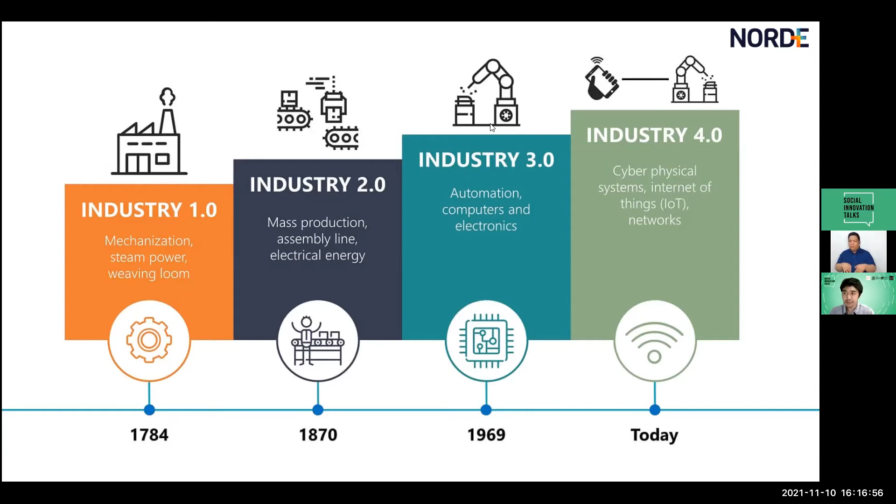Industry 4.0 is really, really big, and as I said before, as people who are living in it, who are experiencing its evolution, many of us are taking it for granted.

For those of you who were born in the age of technology, using this technology may be second nature, natural to learn new programs, new video games, new computers, just like that. But for other people, it's new. And that's what living in a revolution is, a dynamic change, a revolution of the status quo.

To better explain, we'll recap some of the principles and drivers. Industry 4.0, as I've mentioned, is very nebulous. It covers so many topics: health, politics, social welfare, economics. But in order to better see how Industry 4.0 works, we can first look at the principles. These four principles guide Industry 4.0 and benchmark what it's about. First is transparency.

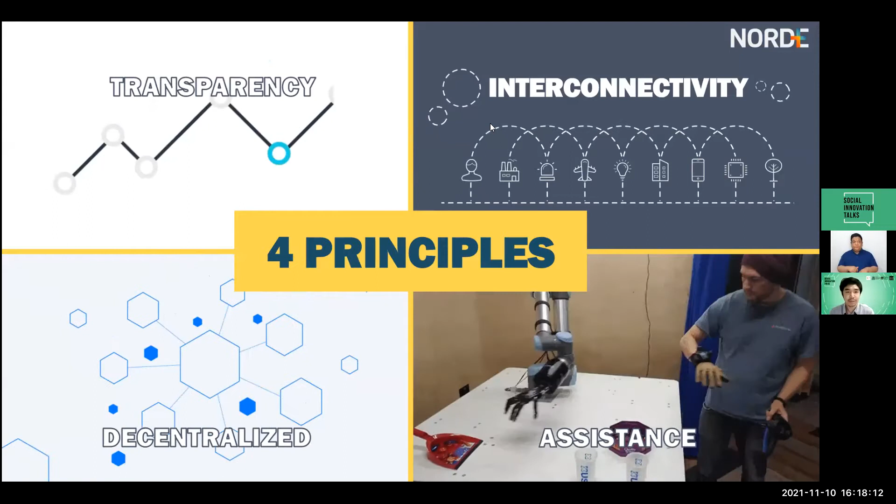Transparency, because we have so many forms of data: collection of health data, environmental data, social data, like the sites we visit, how much time we spend on a computer, how often we go to a coffee shop because we log into their Wi-Fi. We also have data about how many hours we spend playing video games, how much money we spend shopping, how many times we open an app. All of this data reflects this form of transparency, this ability to see and read and understand things.

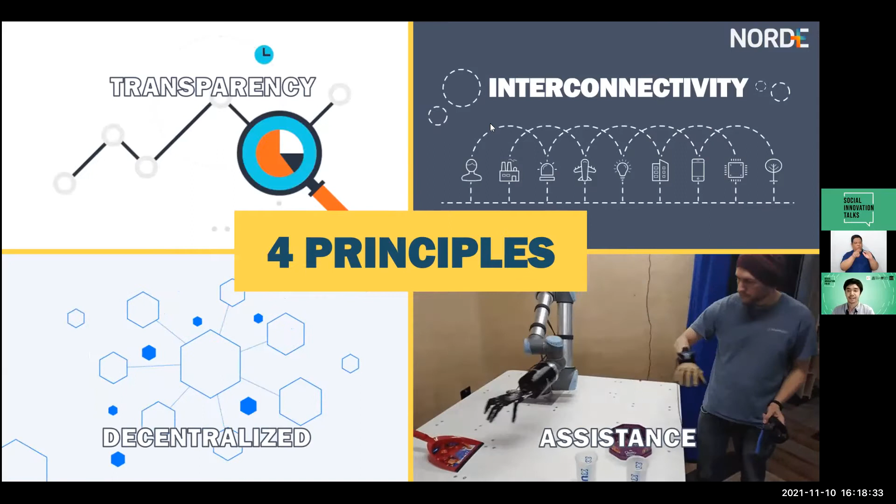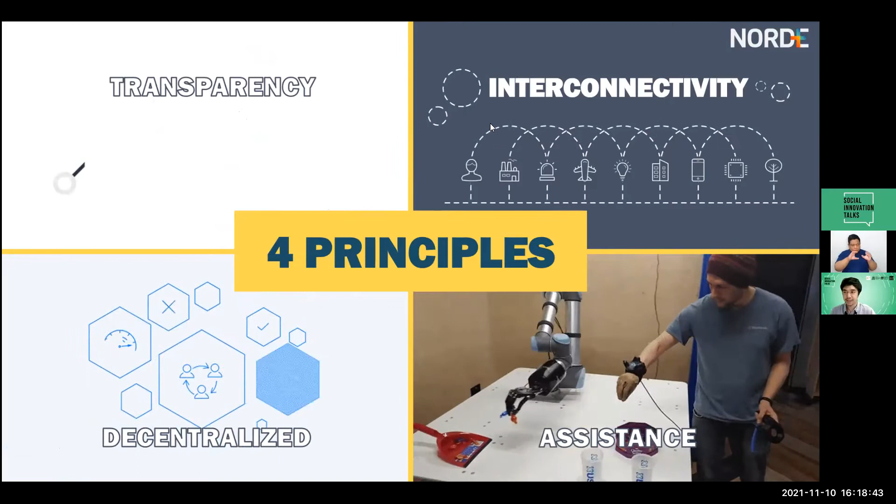Compared to before, let's use the example of the environment. Before, scientists had to make data based off of assumptions and projections off environmental readings. But when people started taking more readings, when there became actual interest in recording the pollution index and the temperature around the world, that data, that ability to see the effects of climate change, allows us to make better choices. We know climate change is happening because the data is there, and that data forms the basis of transparency. So transparency is seeing, reading, and understanding things.

Next is interconnectivity. The internet, probably for me one of the biggest inventions and one of the biggest forces affecting Industry 4.0, has created this interconnected network of systems. These systems could be your cell phone, your computer, even whatever device you're using to watch this webinar now. We have created this interconnected network.

And this has evolved to more than just computers. It's evolved to phones, to your car being connected to Wi-Fi, to street lamps being connected to Wi-Fi. Buses may have their own public Wi-Fi. You may have a local area network within your office that stores data.

All of those are examples of interconnected networks. But it grows and evolves even deeper when you imagine the world. Think about this: you could have been sitting in your house in Germany, for example, and you could have joined our webinar. Because you can do that from around the world, you can have this level of interconnected systems, interconnected people from all over, thanks to the internet.

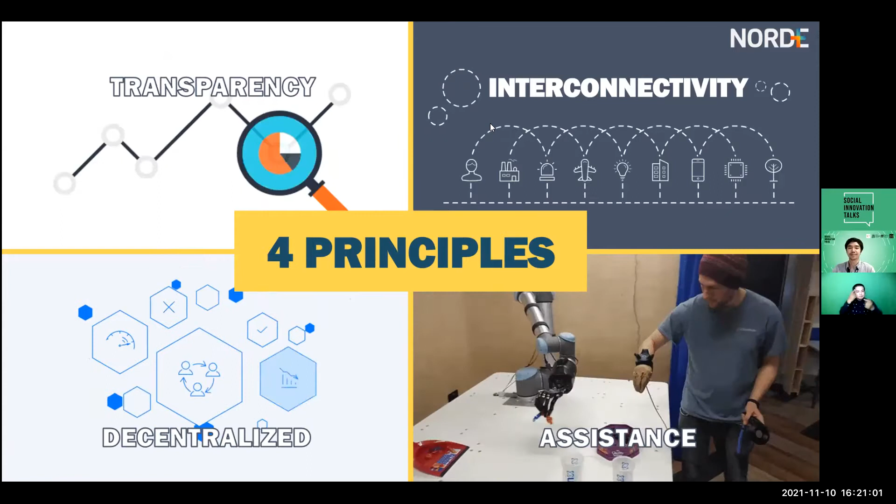The third principle of Industry 4.0 is decentralization. So the idea is, instead of data, information, or a system in general being concentrated in a single place, a single physical space like a computer server, thanks to the internet and Industry 4.0, the information is now decentralized. You have this concept called the cloud, being able to store data in multiple places around the world, and it forms this virtual network of information. That idea of virtual storage is what powers decentralization.

We're no longer limited to central points of importance and information. We're no longer limited to a single DSL cable of a local ISP. With decentralization, our information can be everywhere. I may be presenting this webinar to you right now, but this data could have been shipped to Europe, bounced off a satellite somewhere across the globe, and then sent back to the Philippines. That's all about decentralization—no longer restricting things to a single central point. And thanks to interconnected networks, you have this decentralized system of components and units.

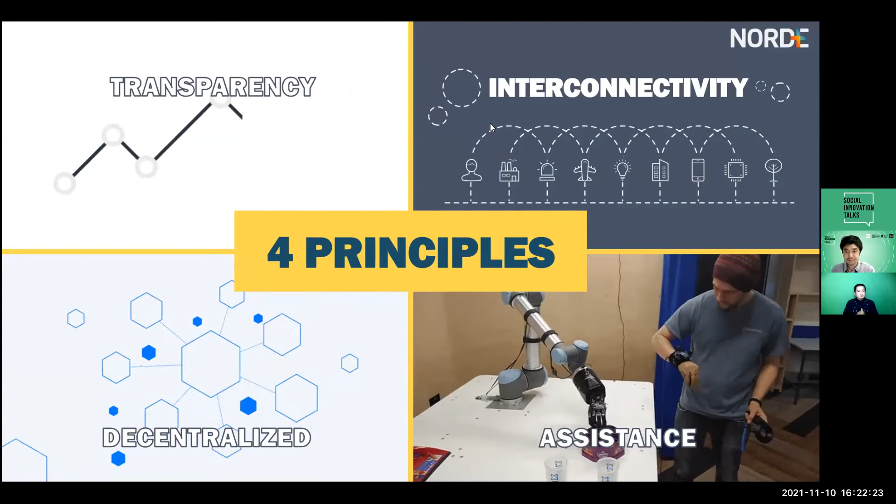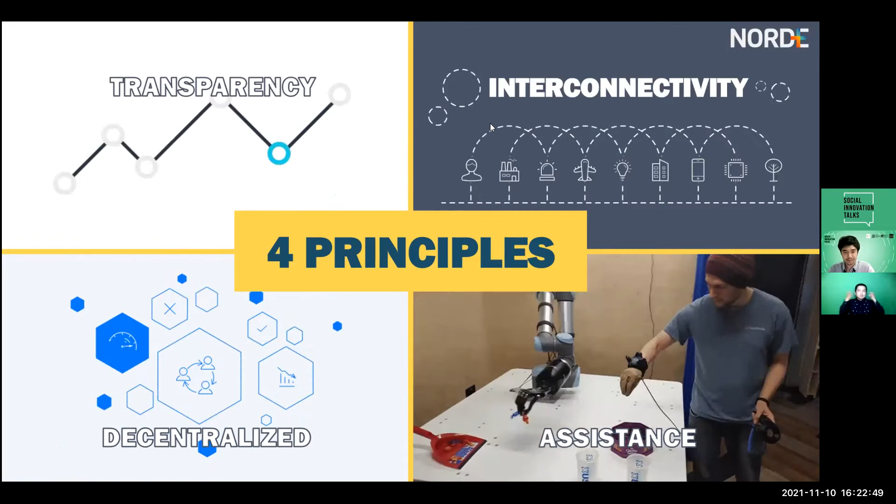The final principle of Industry 4.0, the fourth one, is assistance. All the technology we experience today has been developed, or is in development, as an effort to assist people's living. Your cell phone, your screen that you read, is assisting you to understand information visually. These earphones we wear, the speakers that play sound, assist us to hear that information through audio. So all of these different technologies are such basic forms of assistance that we often don't realize.

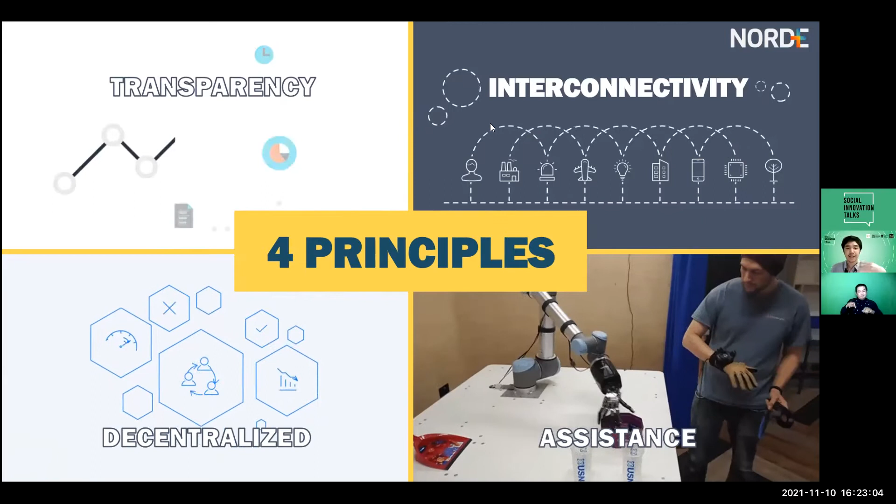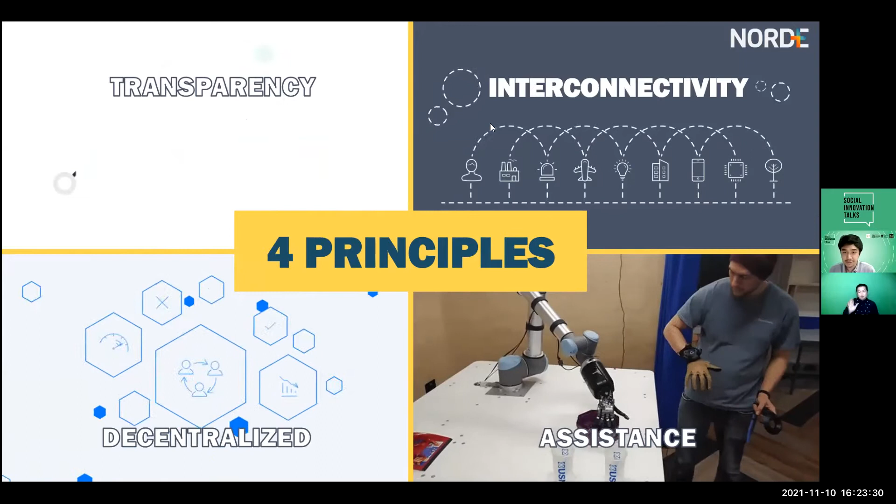Your computer mouse assists you in inputting information to a computer through physical touch. So on a basic level those are some examples, but you can go higher—you have technology that assists you for learning, for example virtual notebooks, ebooks, even e-learning modules. You even have assistance in driving: if you have a car advanced enough to make a sound when you get near an object, those sensors that tell you you're too close assist you.

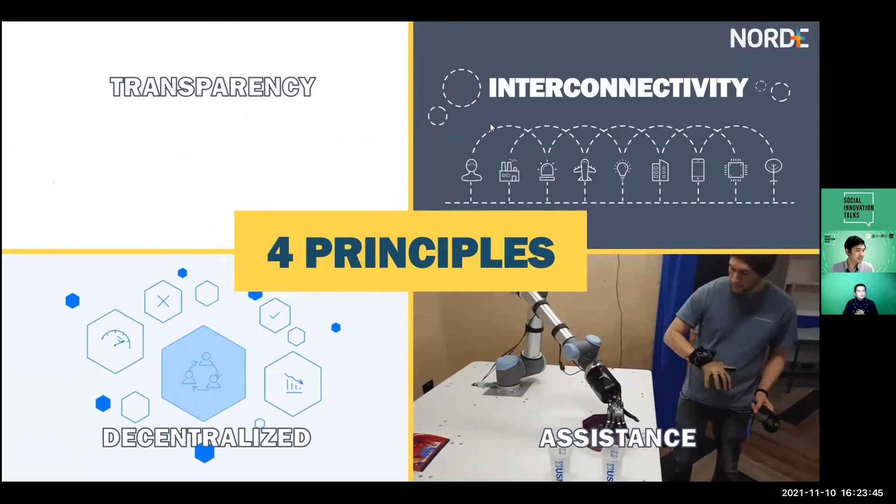All of these technologies have been developed because they assist people to do things easier, to make our lives easier. When you think of it that way, a lot of all the inventions we have—this chair you're sitting on, the screen you're reading—everything is designed in some way to assist people. So those four principles make up Industry 4.0: transparency, interconnectivity, decentralization, as well as assistance. Those are the principles of Industry 4.0.

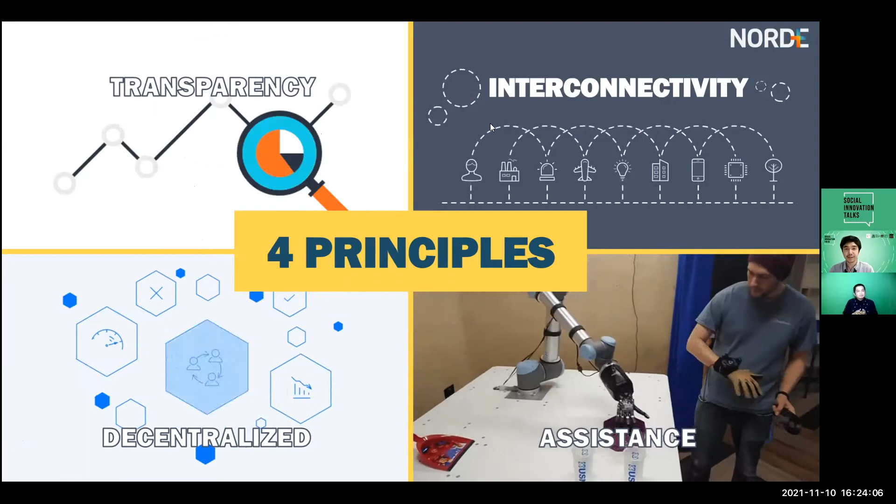Now, if those are the principles, we also want to look at what are the drivers—things that are happening that are pushing us towards Industry 4.0. The funny part is these drivers aren't necessarily consciously being driven. There's not some kind of group or conscious movement pushing people to go to the internet and make online services. No, these drivers can actually come about naturally, maybe through assistance.

The first example is consumer access. When you have the internet, anyone can access it when they have Wi-Fi or a local connection. And if anyone in the world can access the internet, they have access to a whole range of information. When you take that concept and make it normal—it's normal for me to look up what the Fibonacci sequence is, or if I want to look up what art in the Met Museum looks like—it makes it normal for me to want to be able to access information.

Makes me normal for me to want to know things. And this created this idea that thanks to the internet, thanks to these technologies, we deserve to know things. We deserve to know what our government taxes go to. We deserve to know what are the impacts of this particular business. We deserve to know what are the financial reports for our city or our nation, and how does the rising inflation prices affect us. All of these things become taken for granted and standard because consumers desire this access.

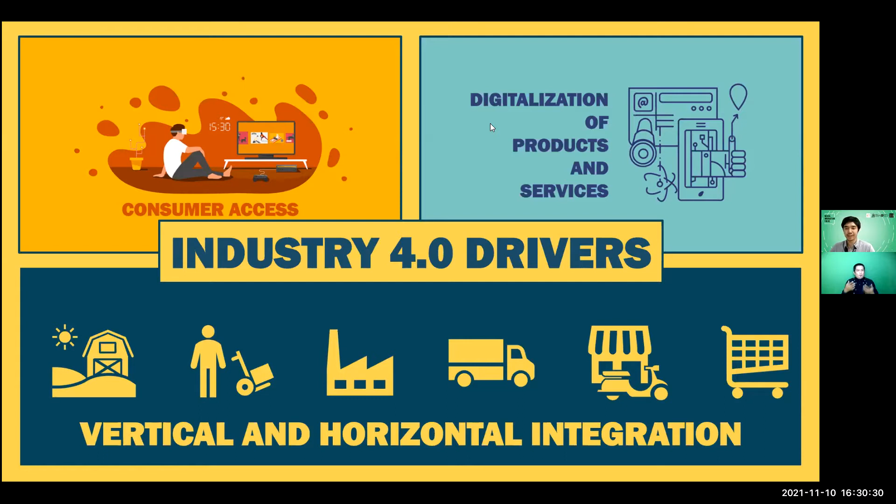And when you think of it that way, it almost feels natural. Indeed, when you're living in Industry 4.0, many of these things feel natural. Of course I'd want to access more things, of course I'd want more services to be digital, of course I want certain processes to be easier thanks to technology. But when you see it's driving this innovation, it makes you think twice: wow, we're really living in a transforming age. We're really in it, and that's my point. We are in it, in Industry 4.0. So I hope that was a good recap for the previous webinar.

Now that we've covered Industry 4.0, one topic we want to cover is the technology itself. We're looking at all these technologies, all this information, and we want to see what's come up. I talked a lot about new technologies, especially digital fabrication. Emerging technologies is hard to define because there's so many new ones, but some of the things we'll cover, especially today and in our next webinar, are the following.

Today specifically, we'll be covering digital fabrication as well as FabLab. In the next coming webinars, we'll be talking about smart cities as well as other technologies such as robotics, artificial intelligence, quantum computing for the future. But for now, we're going to focus on digital fabrication.

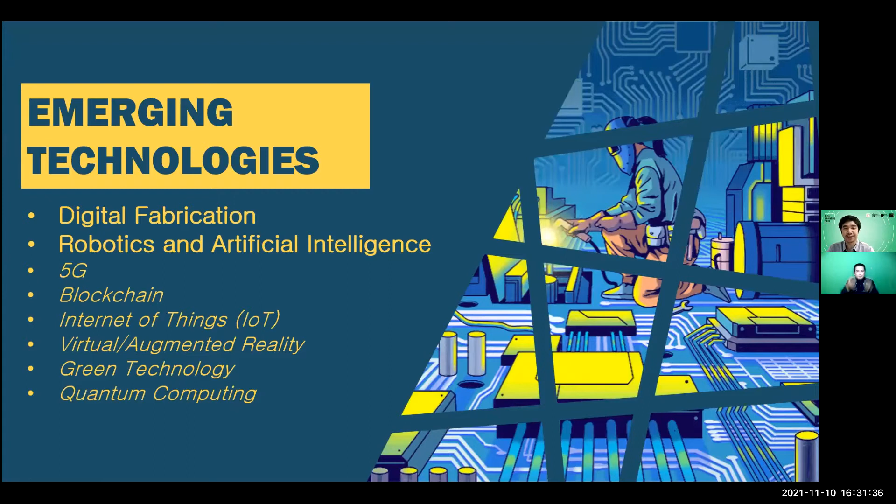When we talk about digital fabrication, the basic idea is making things with the help of digital technology. Digital fabrication to make things. The first thing I want to remind you, which I said at the start, is digital fabrication is a tool, it is a process. Fabrication is making something, but humans have to design, humans have to decide what they're going to make.

Throughout this presentation we're going to talk about different industries which it applies to, different applications you can make, different machines, what are the actual technologies in there. But it's important to keep it human-centric, okay? Because I don't want us to think, wow, with all this new technology we don't need to do anything as human beings, or that we're being replaced. No, these technologies are new ways that humans can make things.

And that is, for me, a very important preface, because it avoids a lot of very difficult arguments when you talk about replacing human workers or making the human useless or worthless. It's not necessarily that accurate, okay? So going to our topic now on digital fabrication: the idea is it combines 3D modeling, also known as computer-aided design or CAD, with additive and subtractive manufacturing. That's the gist of digital fabrication.

Now, the important thing to remember is that CAD stands for computer-aided design, which means this is anything you design or sketch using a computer. This can mean CAD software, for example a basic one would be 3D modeling. If I wanted to make a character for a video game, I would use a 3D model. But it also applies to graphics - if I wanted to make a digital painting, I would use illustration software. That technically is a form of design aided by a computer. If I wanted to make jewelry and sculpt some very detailed earrings, that process of making that model, making that design, is still a form of design, but using a computer.

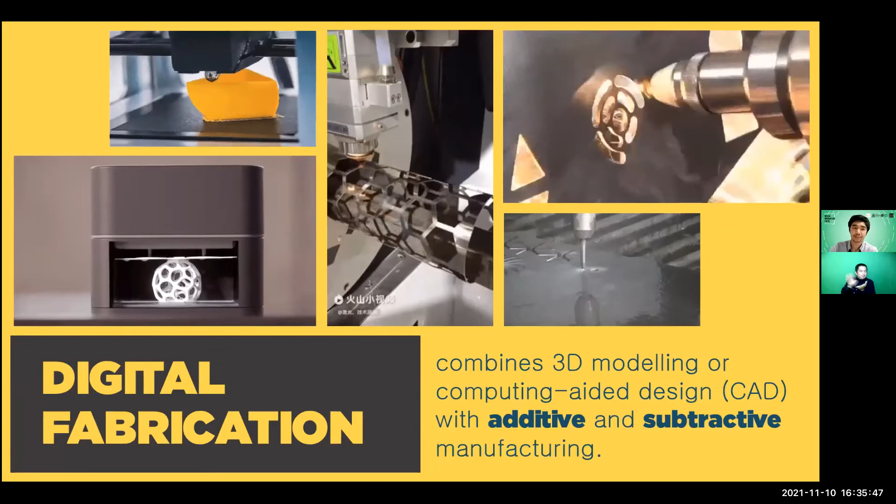Because from my experience, many people know how to use these software, not because it was their job, not because it was their course, but because they wanted to try it out, because they had a hobby, a passion for it. And because they knew how to use digital technology, it wasn't very hard to learn. You could have learned through a video, an online tutorial, like how to make vector art on YouTube, for example. But the idea there is that digital technology, digital design, is more accessible for more people.

It has less cost in terms of barrier of entry. And as long as you're using a computer, you can actually use these technologies. With that in mind, those of you who know how to use CAD, it could be 3D modeling, it could be 2D vector graphics, whatever it is, you can actually use these machines yourself.

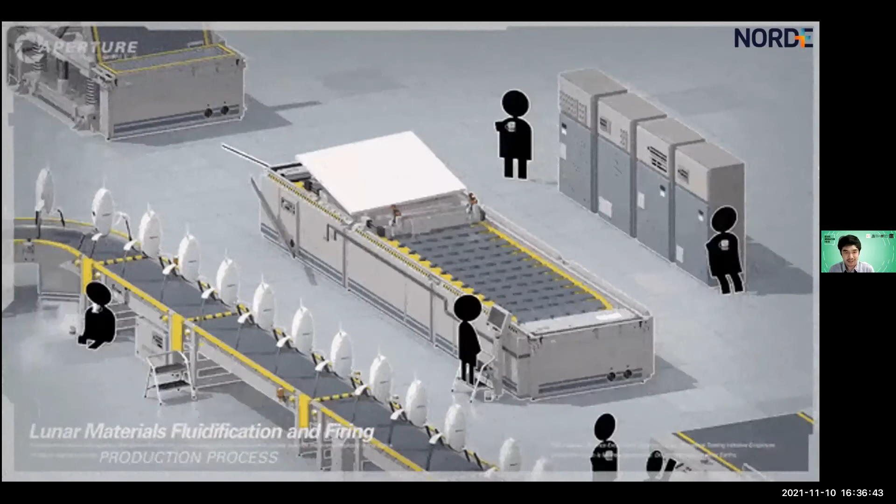Now, when you talk about fabrication, we always imagine a manufacturing plant, right? Some kind of long, complicated, often dangerous process of manufacturing something. But what digital fabrication does is it takes these technologies, this ability to manufacture things, and combines the use of a computer to operate the hardware, the machinery. So instead of having to operate the dangerous equipment yourself, the computer is the one that helps process that fabrication.

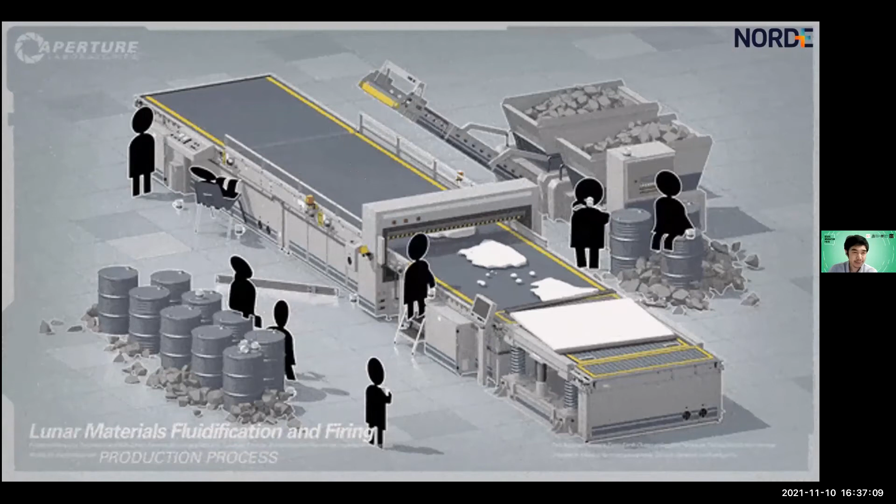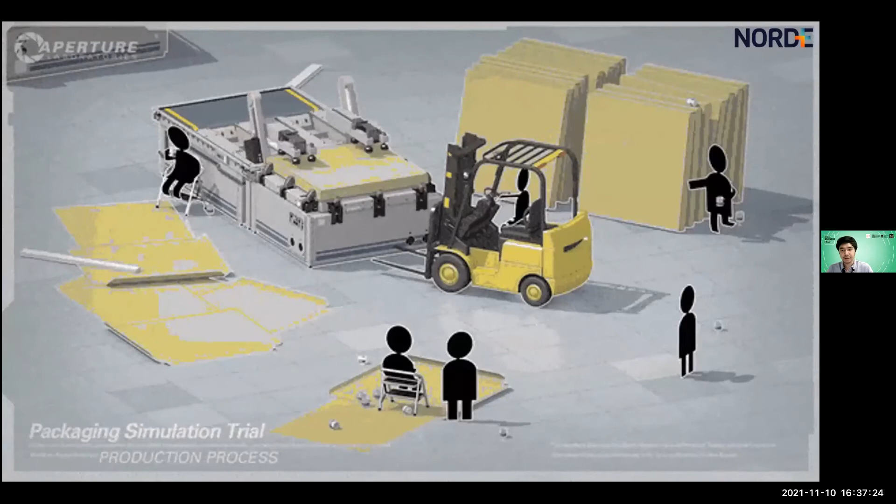So instead of you having to learn how to use a paintbrush, how to draw with a stylus, how to sketch with 3D clay, for example, the software does that for you. The software does the color for you. The software does the thickness of the stroke. The software will tell you what kind of 3D shape you're doing. And that's what makes it digital.

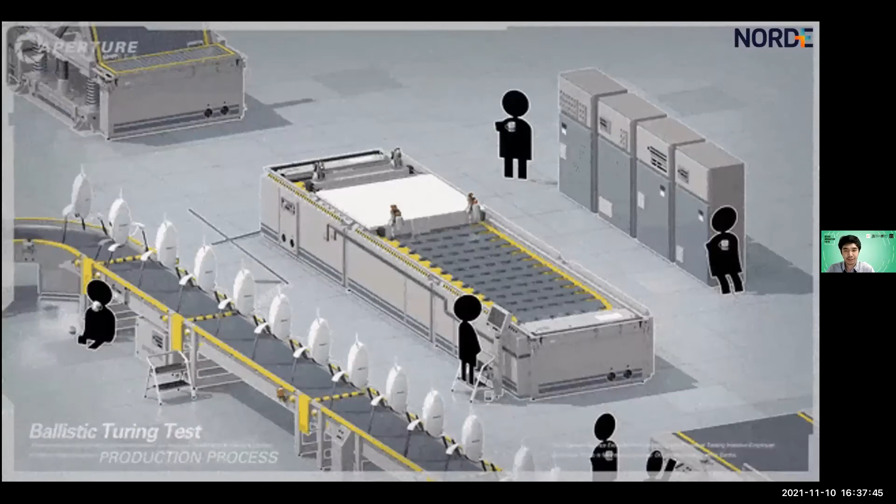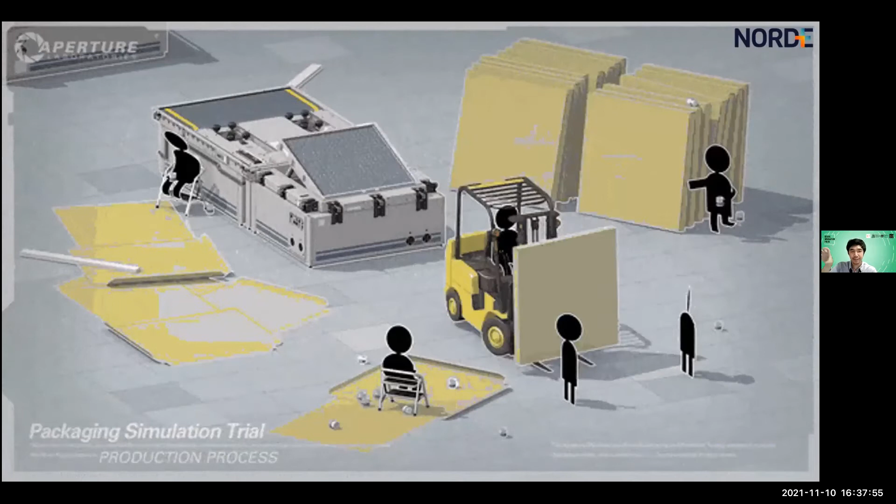And the fabrication part is similar. Instead of knowing exactly how fast the motor should spin, instead of turning a tool by hand or hitting it with force, the computer does that process for you. It knows how much force to put on the material, how fast it should cut through the material. And that's what makes it more accessible, makes it easier. It combines traditional fabrication processes with digital processes, and boom, you have a digital fabrication process.

So there. Now, before we talk about digital fabrication and the many different technologies that are in there, it's easier to set the tone first with applications, meaning where can I use this technology and how can I see it in action?

So when you talk about applications, and we talk about digital fabrication, many people first think of engineering, right? They think of industrial applications, making cars, manufacturing planes, electronics. All of those are usually the first bit. But because of how versatile and flexible digital fabrication is, they've actually started using it in a lot more subjects. But before we go to those, let's first look at engineering.

So CAD was very synonymous with engineering in many ways. Well, first and foremost, it allowed us to visualize complex shapes, complex processes, thanks to computer graphics. And so even complex machinery like this, complex mechanisms, or even the idea of a house, can all be simulated and generated using 3D files.

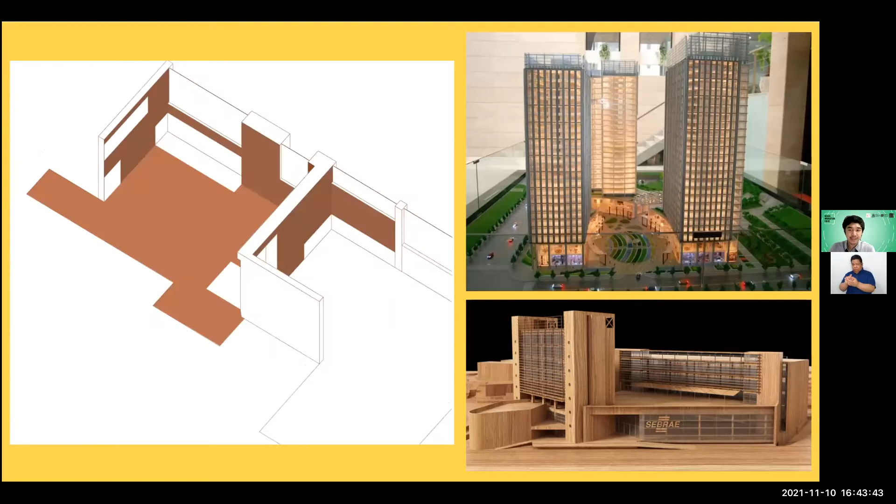So what they do is make it in 3D. They use rendering software such as CAD modeling to make a 3D render of your house or room. From there you have a better understanding of the size, how big the space feels, the way it flows - important details only possible when looking at it in 3D. Then you can take it a step further: instead of just staring at a digital 3D model, you can use a fabrication device that reads your 3D design and manufactures it in real life. These are ideas that go from a traditional idea all the way to a physical concept.

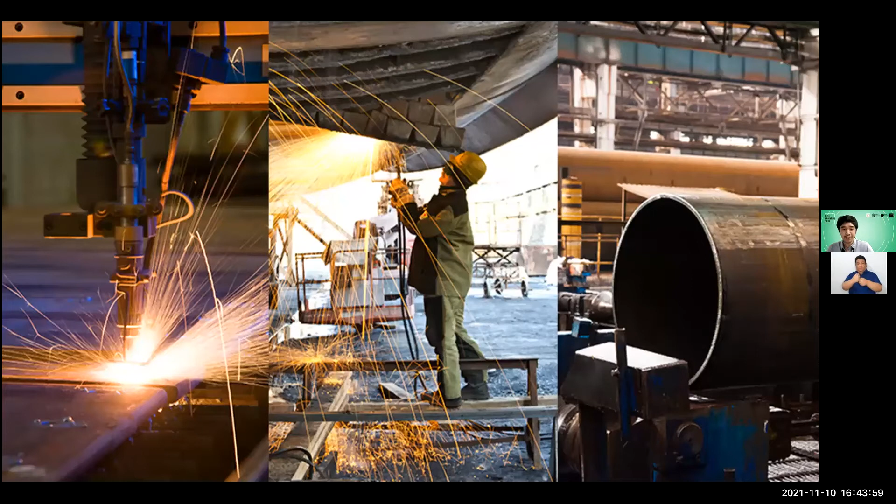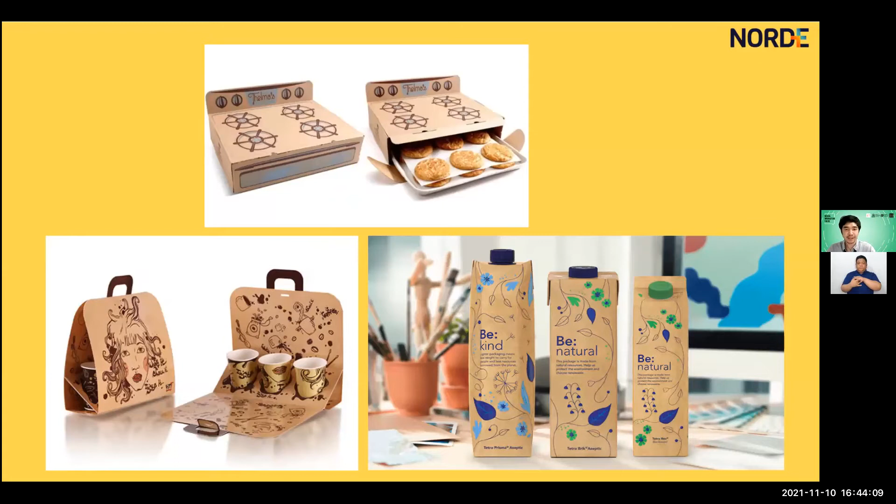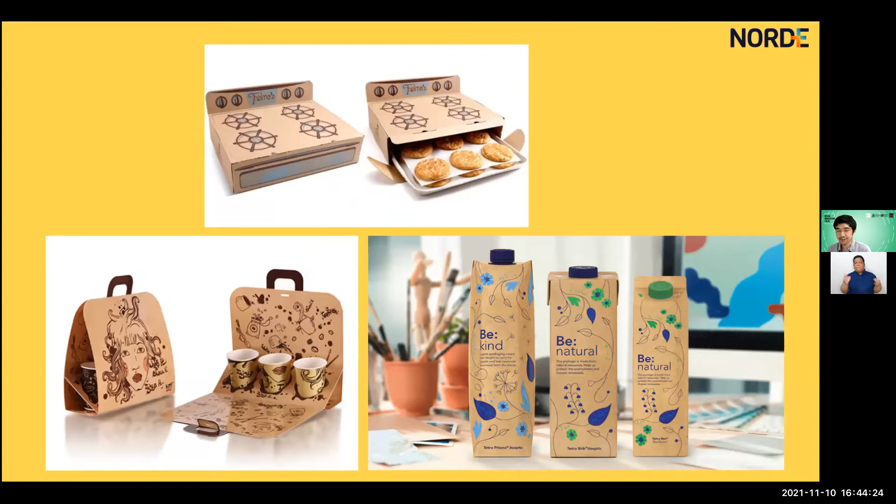Next is manufacturing - when you say fabrication, it's very obvious. Traditional manufacturing processes have been going on for a long time, especially fabrication processes. But combining things like digital technology has opened a new level of detail, a new level of production, a new level of customization and personalization. One example I like to mention is packaging. When you look around, you have so many different kinds of packaging - the boxes your food comes in, the wrapper of the chips you ate, the plastic bag. All of those are forms of packaging, and there are as many kinds of packaging as there are products.

You have hundreds and thousands of different kinds of chips, candy, and food—too many to even mention. So what digital fabrication did is, rather than someone having to create each individual design on their own and repeat it by hand, digital technology allows us to create custom designs that are more fluid.

What do I mean by fluid? If you have a design on Photoshop and want to change the title, say from Gideon's Cookies to Gid's Cookies, it's as simple as opening the text box and deleting characters. But imagine if you had to paint that onto a tarpaulin by hand and post it on a wall. If I wanted to change my name, I'd have to buy a new tarpaulin and have it painted again, going through the entire process. That's definitely harder than just pressing backspace a couple of times on a computer. Digital technology is more flexible and more fluid.

Especially when you look at digital design, because of how easy it is to manipulate digital data in a good way, it's easy to create your own designs. Like right now, we can all go onto Paint and draw up some kind of ugly design for a new cereal box. You could, because the technology lets you do that.

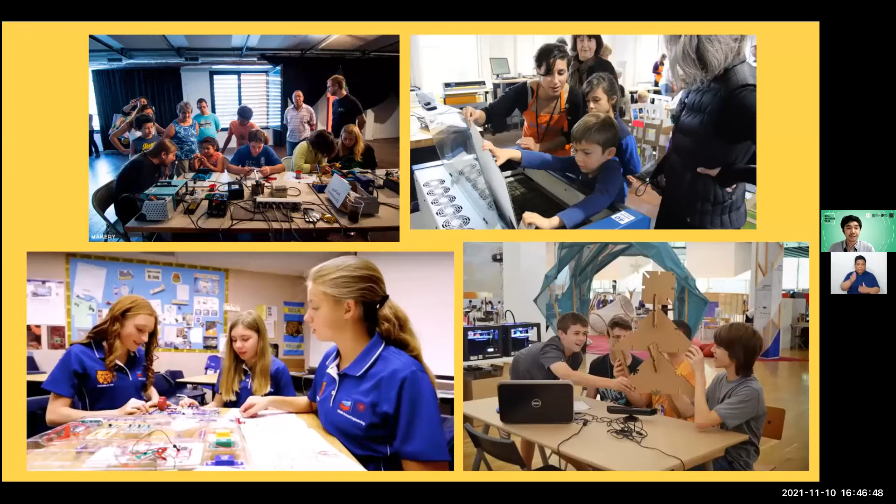Another rising place that digital fabrication has come up is academics. I want to preface this because we're living in Industry 4.0, and this technology is appearing everywhere—not just in our homes, but in our businesses. If you were growing up and wanted to work somewhere, you would have to learn how to use a computer, for example.

Because schools have realized how important these technologies are, it has become part of the curriculum. There are more and more schools adopting digital courses. I think Benilde is actually one of the leading multimedia institutions from what I've gathered. So in the academic section, because people are learning about new things, it's only natural for them to want to integrate digital mediums.

When you're in school, the idea of shop class isn't really existent here in the Philippines, or not so often. But the idea was you learn something in school, and if you went to work in a factory as an adult, you'd have to learn how to use and operate those machineries there. But what happened was, when they took those dangerous machines that were operated by hand and put a computer in charge—handling dangerous processes like pointing a laser beam or moving around the drill bit—they became, in some way, safer to use.

Instead of me having to hold a laser beam and cut a piece of wood, the computer does that for me—I simply tell it what to do. This turned these technologies into safer forms of fabrication. You can have a desktop laser cutter, you can have a 3D printer. This opened up the ability for these dangerous, complex machineries, once only available for manufacturing, to become digital versions that are safer to operate, more reliable, and more compact. Schools realized students can now actually use and learn how to operate these machines and have the skills needed when they go into industry.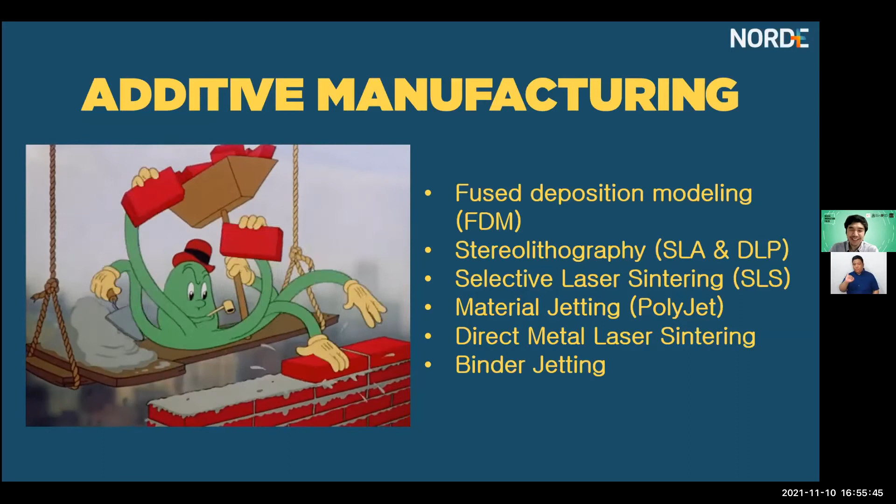And if you look at this list, I believe Nico, one of the names here, mentioned binder jetting as their topic. So I feel like it's a nice sneak peek, and also very advanced because it's part of the different technologies.

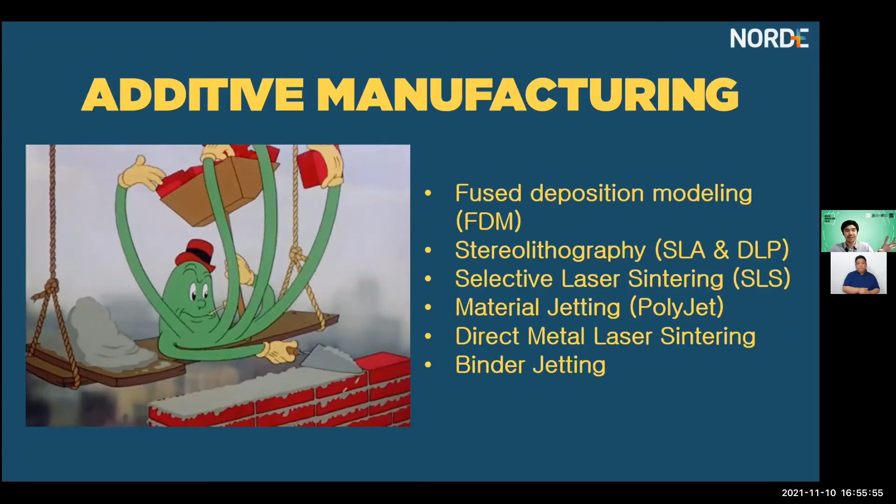Now when we look at the technologies themselves, the important thing to remember is that they're all additive, so it helps us to understand them. And the things you can make with them are kind of virtually anything. Not anything, okay, because there are some things that are impossible to make, but almost anything can be made using these processes. Why? The advantage of additive manufacturing is because you're building it up layer by layer.

That means that complex shapes can be built slowly. Do I have an example here of something that's complex? Here, for example, this thing. Oh no, the webcam is having a struggle. So you can do it, you can do it. Okay, there.

So this is actually an engine housing from an engine block, right? And if you see all the holes in there, this is actually very complex to make. If I were to ask you to mold this out of clay, it would be quite difficult. If I were to ask you to cut this out of a piece of wood, like carve it up, I'm sure you would have an even harder time. But because additive manufacturing builds the layers, come on, you can do it.

Because additive manufacturing builds it layer by layer, it actually is quite simple when you see it from that perspective. So it may look very complicated with a lot of parts, but when you dissect it into each layer, it's like a big pizza, you know, one slice, put the next slice, then the next slice. So all of these shapes in this example look complex, you see complex patterns, complex geometry. But when you look at it from the perspective of building it layer by layer, it's easier to see how you can break down that complexity. And indeed, it's one of the strengths of additive manufacturing, the ability to make complex shapes.

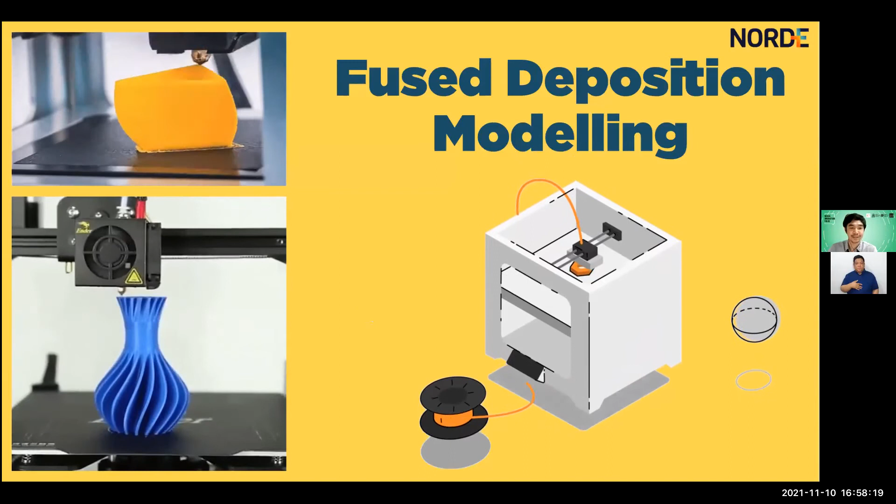Because in a 3D printer or FDM printer, it takes a spool of material, usually this is plastic, right? It's like a string. And it will deposit it in a specific pattern or shape and fuse it together using the heat of the plastic. And when you fuse and deposit material in a specific shape and you model the final shape, you can get stuff like this.

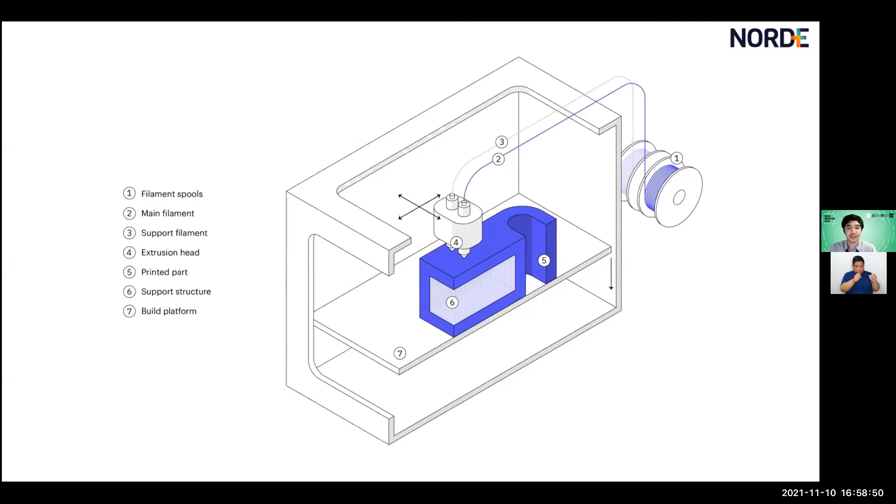So for example, our complex geometries such as this are made possible because it fuses material together using the heat of the plastic by depositing it in a specific pattern. The cool part is the machine deposits the pattern according to your design, so the machine itself is actually very flexible in what it can make. Believe it or not, one machine can actually make all of these designs, whether you're using it for art, architecture, engineering, or even to make a beer holder. All those different shapes can be made using the same machine because it deposits material in a specific pattern, not limited to one specific shape.

Okay, so next one is called SLA printing. This may have other names like resin printing or DLP. The idea here is that instead of using a liquid plastic, we use a liquid resin instead, and this resin is cured or hardened using light. So what happens is there's a pool of liquid resin, and a beam of light hardens the resin at specific points, generating the geometry.

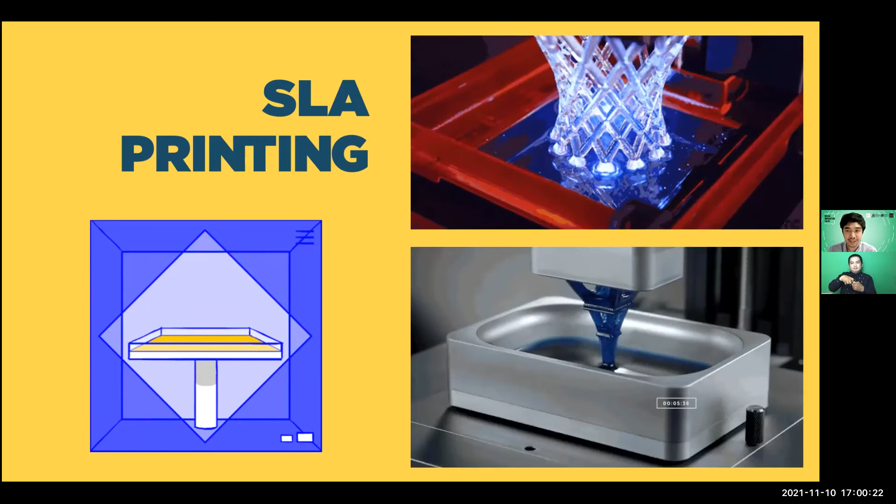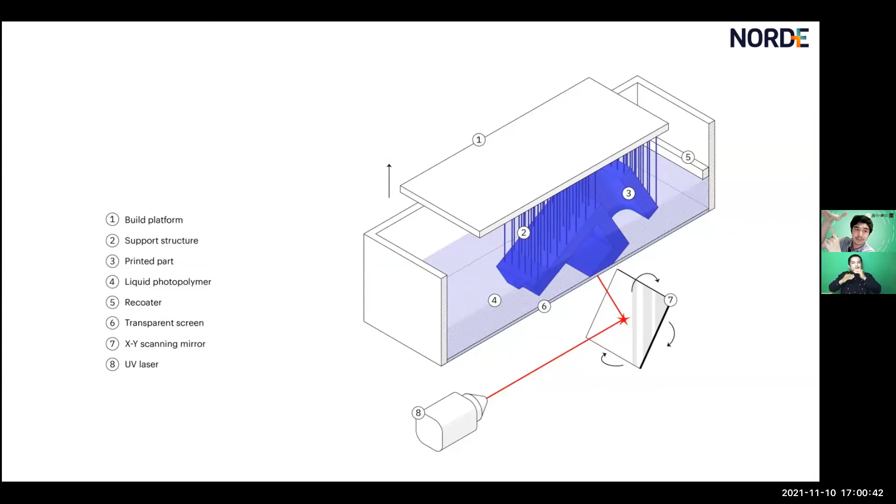The benefit is because we're using a beam of light, which can be very precise, you can make very intricate shapes. In this case, the object is immersed in a vat of liquid, and a laser beam is shot and aimed at a specific point. That point hardens the material and builds up the shape slowly, layer by layer, going up until it makes a shape. So when we talk about SLA or any of these resin processes, they're usually a lot more accurate and have finer detail because you can use a very concentrated beam of light to harden the resin.

So the benefits are these are usually used in more decorative applications, for example jewelry, and in cases where you need fine detail and complex shapes. You can contrast this with plastic, which has specific properties - it shrinks, it melts in heat. But resin has more flexible design parameters, meaning it's easier to create complex shapes like bones, architecture, small pieces of jewelry. They even have resin printers that can go as small as 30 microns, which is definitely smaller than a human hair. There are very intricate things you can make with SLA, usually meant for jewelry or these kinds of applications.

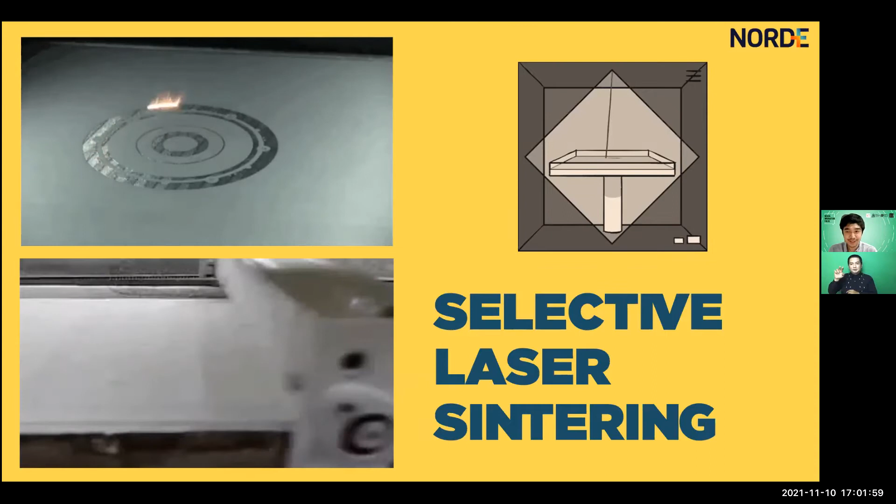Now, next one is called selective laser sintering. Okay, so we'll break it down. It's selective because it chooses a specific part, which is the model. Laser, because it uses a high-powered laser. And then the keyword here is sintering - sintering is the act of joining or sticking something together using heat or using a process.

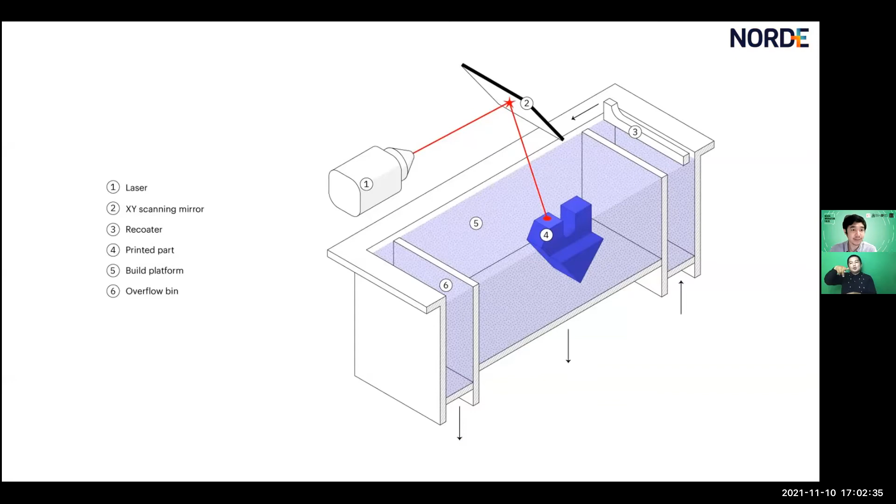So this is actually very similar to SLA. In SLA, they use liquid resin. In SLS, or selective laser sintering, they sometimes use powder of, let's say, metal or polymers. This powder of material is zapped by a laser that fuses it together. So imagine the complex shapes you can do with SLA, but combined with the material properties of polymers - this could be nylon - and you create shapes like these. These machines are usually more expensive because they need a very high-powered laser, but in turn they produce output that is engineering grade, meaning very strong, mechanically safe and sound to use.

And there are a lot of things you can do here - you could create intricate shapes. They're usually used in engineering applications, for example where you need something to look like an injection molded part, but is actually made using additive manufacturing. And again, it's additive because you laser the powder and build that shape slowly, layer by layer.

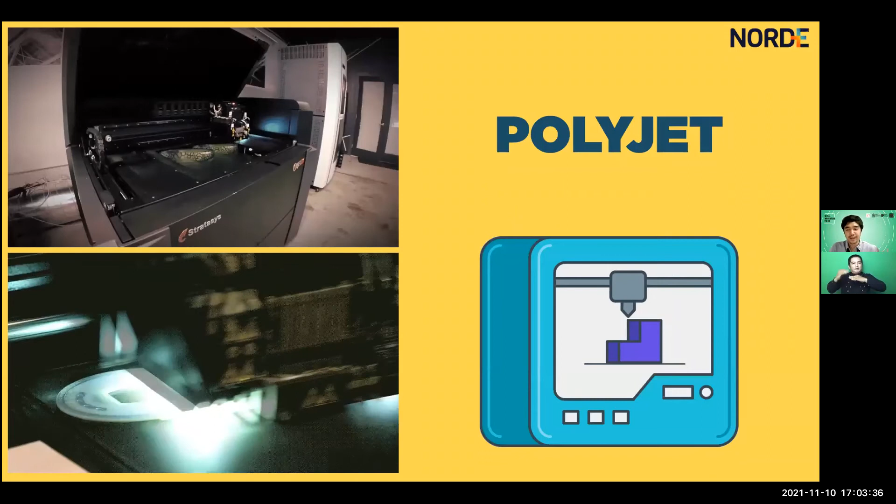Now, next one is called Polyjet. To explain Polyjet, it's helpful to think of your desktop printer. In the desktop printer, the print head moves around and shoots colored ink at specific points. What Polyjet does is combine that technology, but instead of shooting regular ink, it shoots resin ink that can cure and harden, and it does this layer by layer. If you could take your DeskJet printer and make it print upwards, you would kind of have the same thing.

It builds it slowly using small droplets of resin. That's why it's called jet - it jets and sprays to make these patterns. The similarity to DeskJet printing is that you can even use colors. If you use colored resin, you can make intricate shapes like these.

For those familiar with 3D printing, when I show images like these, the usual idea is that they were painted, assembled, or post-processed in some way. But using a Polyjet printer allows you to have this level of control, and you can make multicolor prints like this. Polyjet is one of the cutting edge technologies in 3D printing, and it hasn't been fully widespread - it's very expensive. But seeing these things, the possibilities are really insane.

They've been used in medical applications - you can see they can map out every individual vein and artery inside the heart. They've done it for brain scans, taking individual blood vessels inside the brain and printing them in 3D form. They've used these for surgeons - for example, if there's a tumor in the kidney, rather than using a CT scan or 2D X-ray to base their operation, they can 3D print an accurate, life-like replica of the human body to show those tiny details and help them plan. It's really incredible the things they can do.

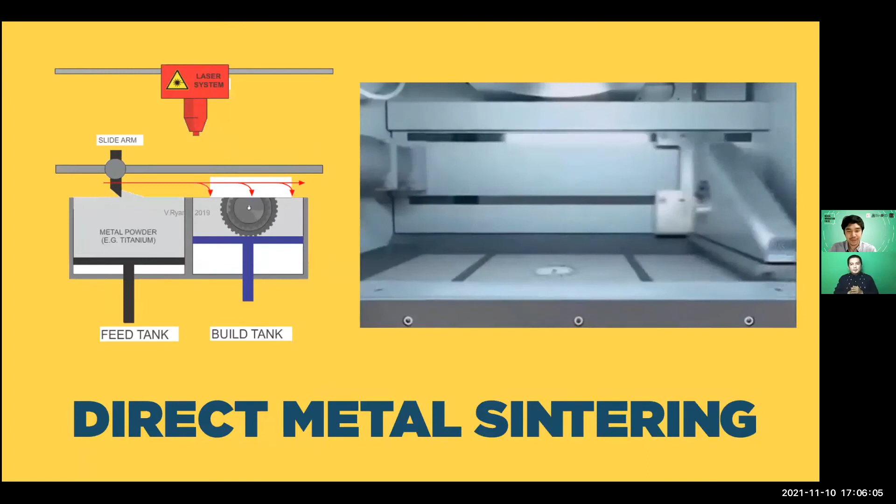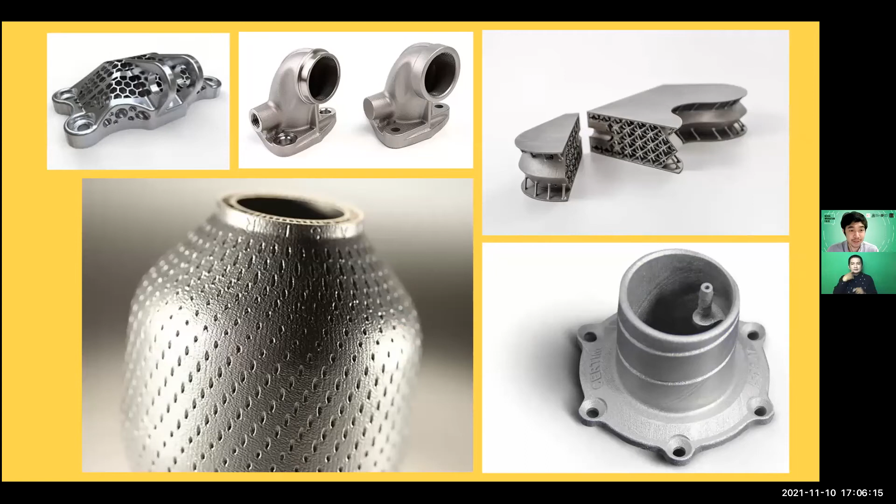Now the next one I'll discuss is called direct metal sintering. This is very similar to what we discussed about SLS - it uses the same word, sintering. But the difference is it uses metal powder. A lot of questions people ask are: can you 3D print metal? The truth is yes. You need a specific machine, and they are actually quite expensive, but you can.

In this process, you can build up metal objects by lasering the metal particles together - that's what direct metal sintering does. It lasers those metal particles and sinters them together into complex shapes. Some of the things people have done with this, because it's using additive technology, is build these complex shapes.

They've actually used it to develop lighter engine turbines. Imagine the picture in the top right - that complex, intricate network of parts. It has the same structural strength as if it were solid, but it's only 80% the weight. Those kinds of innovations are possible because of additive manufacturing. If I asked you to make that kind of structure using a drill without destroying it, it would be impossible. If I asked you to cast that in a mold, you wouldn't be able to make that geometry. There are things possible thanks to additive manufacturing, and these technologies make it doable.

Again, it's similar to SLS - it uses a laser that sinters a powder, but this time the powder is usually metal. That's direct metal sintering.

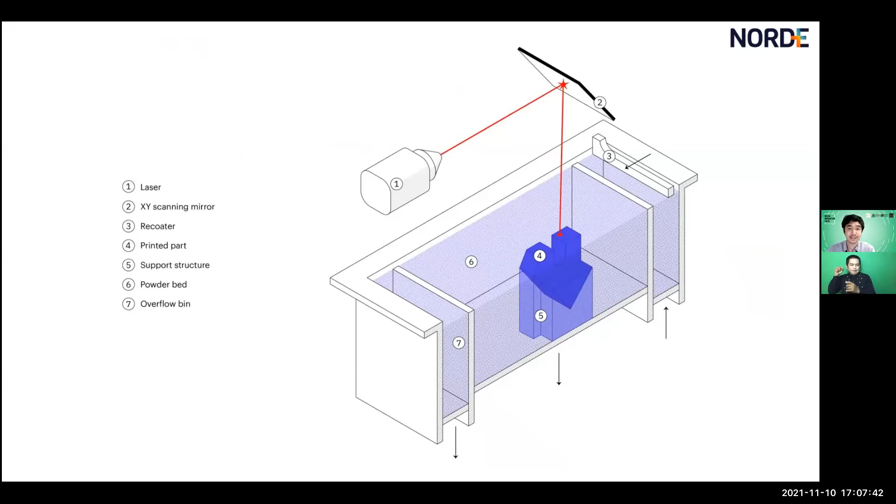Okay, next one is binder jetting. This was something Cernico posted about, I think. To explain binder jetting, imagine you're at the beach and you want to build a sandcastle, and there's just a dune full of dry sand. You can't build sandcastles out of dry sand. So what do you do? You pour water on it - you pour a little water, the sand gets a bit stickier, and then you can actually build up your sandcastle.

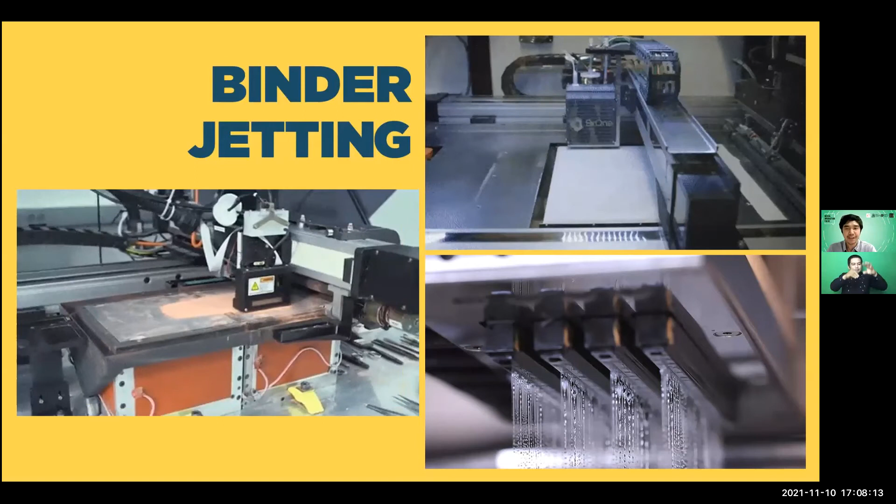You get the same kind of idea in binder jetting. You have a bed of material, powder, sand so to speak, and you jet a binder that makes the particles stick together. Once they've been jetted together, you can build up that shape, then put it through an oven, which molds it together as a single piece. This is very common in manufacturing processes, and you get output that looks like this. Because you're using a powder and a binding material, you can make things out of both plastics and metals.

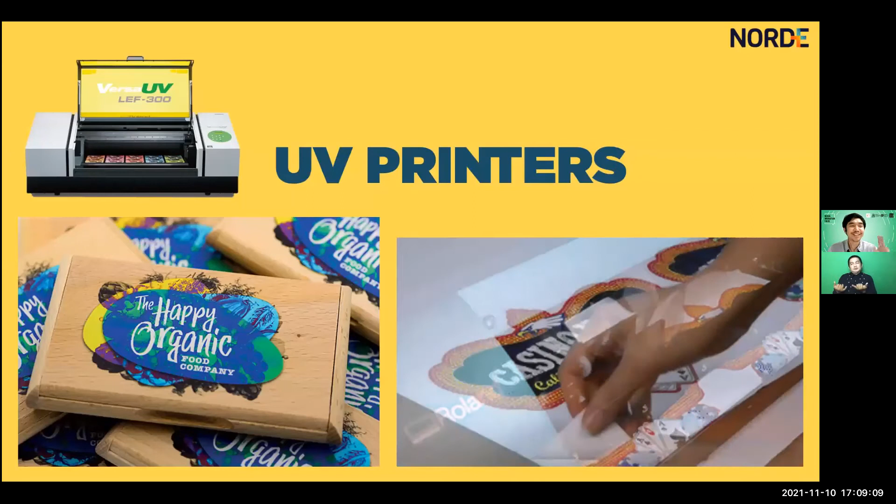Now, it's very funny sometimes to include 2D printers when we talk about 3D printing, but they are technically additive. So in UV printers, the difference between normal printers is that in UV printing, they print a special kind of ink that cures under UV light. And this causes it to harden with a better structure, meaning it's more resistant in terms of wear. And at the same time, because you're jetting and printing this ink that's very thin, you have all the benefits of 2D printing with the strength of making it a polymer while being super detailed.

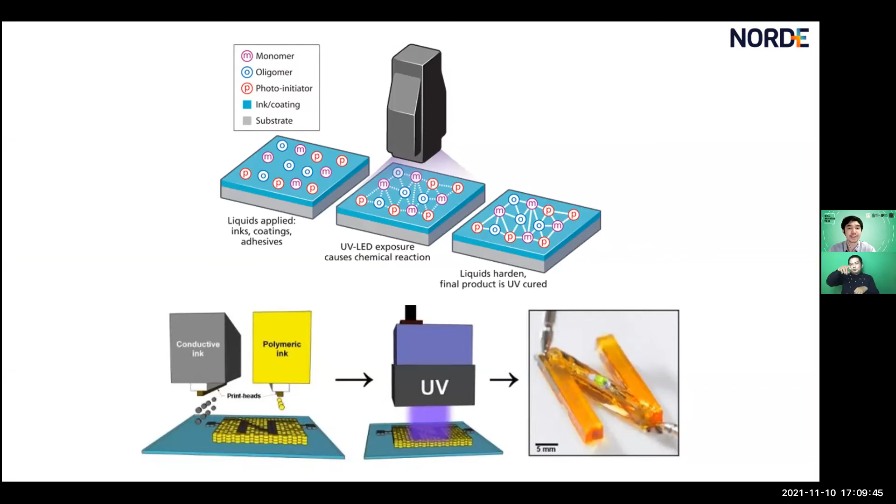So some of the things that actually have been used, if you've ever seen merchandise, you've probably seen something that's UV printed. You could print directly onto fabric, directly onto wood, directly onto plastic.

UV printing is actually really cool, especially if you're in the graphics department. So we've always imagined, like when we make merchandise, your limitation is always, what stickers can I use? I want to make a sticker to put on a phone. But what if you could put your graphics and apply it directly onto your phone, directly onto a tumbler? And that's the kind of thing you could do with UV printing, because it prints a very powerful ink that binds itself to the material.

Okay, so that's it for additive manufacturing. And again, it may seem very confusing, like there's so many different kinds. But the important thing to remember is that all of them are adding. So you started with nothing, and then you're adding material layer by layer. So that's what makes up additive manufacturing.

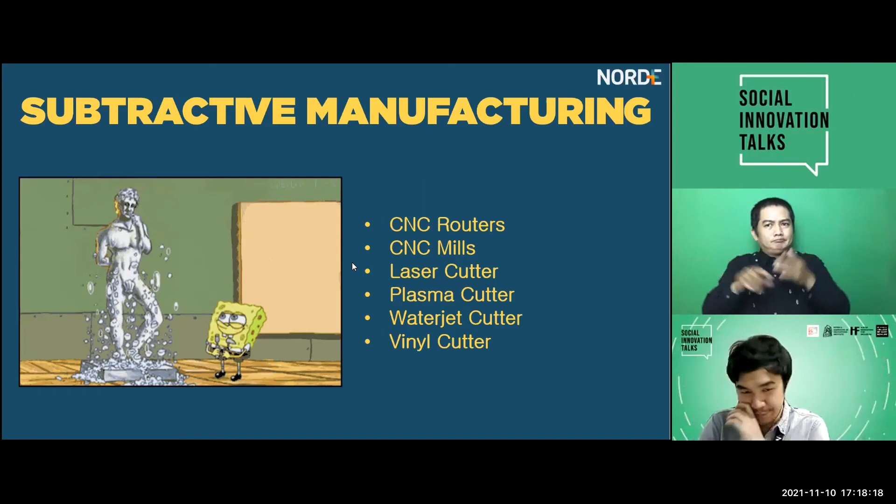Okay, the next one we'll be covering is subtractive manufacturing. So this is actually pretty fun because when you compare it to additive, this one might be easier to understand. This may be for some people, if you've ever seen a CNC mill or a CNC router, that would be a form of subtractive. Now, let's go first in what is subtractive manufacturing.

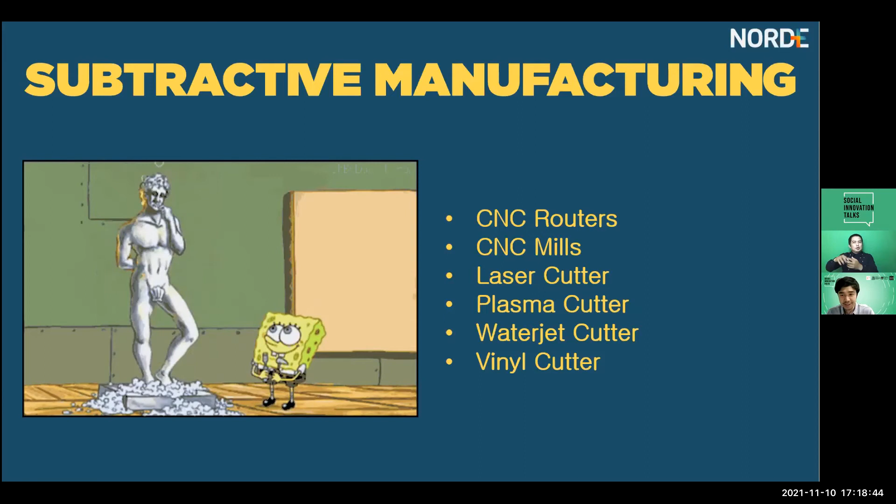So subtractive manufacturing is kind of like sculpting. And subtractive manufacturing covers many different machines, routers, milling machines, laser cutters. All of those are different kinds of subtractive manufacturing. And these kinds of applications, these intricate shapes, these wooden forms, you could be looking at brass, jewelry, even metal assemblies, even furniture have been made using subtractive manufacturing. Okay, so really intricate shapes, even complex shapes, very heavy, hard shapes, can all be made using this process.

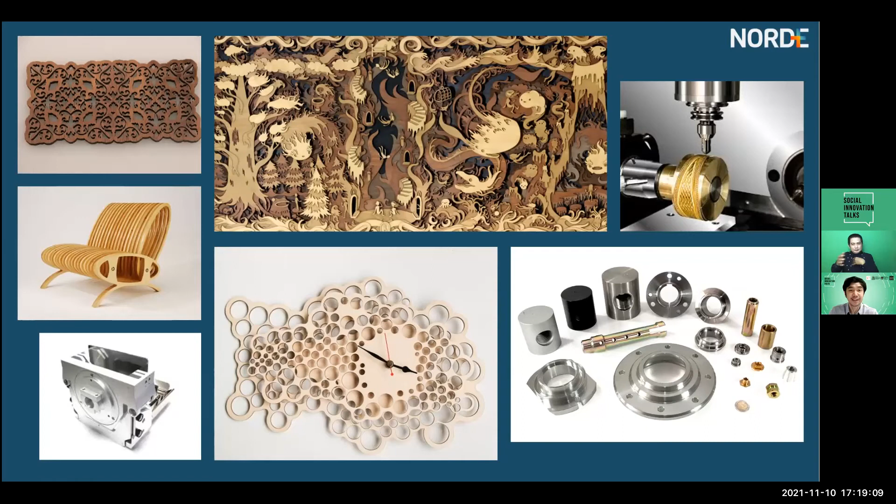Now, subtractive manufacturing is like this. You have an existing material, like a block, and you will actually cut away or remove material from that shape. And that's why we call it subtractive, because you subtract material away from your piece, leaving behind your product. So that workpiece can be many things. It can be metal, could be wood, many different things. But the same idea is there.

So for example, if you're looking at a CNC mill, or in general, we call it CNC machining, it uses a drill and cuts away and shaves tiny pieces of material off very slowly. And that's how you make those shapes. If you're talking about a laser cutter, it will burn using a laser to get rid of that material, to subtract or remove it. And one thing we can mention, like water jet cutters, it can even use something like water combined with some abrasive sand to actually cut through metals by putting it at a very high pressure. So all of these are forms of subtractive machines because they remove material to manufacture things.

Now, when it comes to CNC machines, and this is something you'll hear often, CNC, this stands for computer numerical control. So CNC, whether you're looking at CNC machining, CNC milling, even 3D printing is a form of CNC, means computer numerical control.

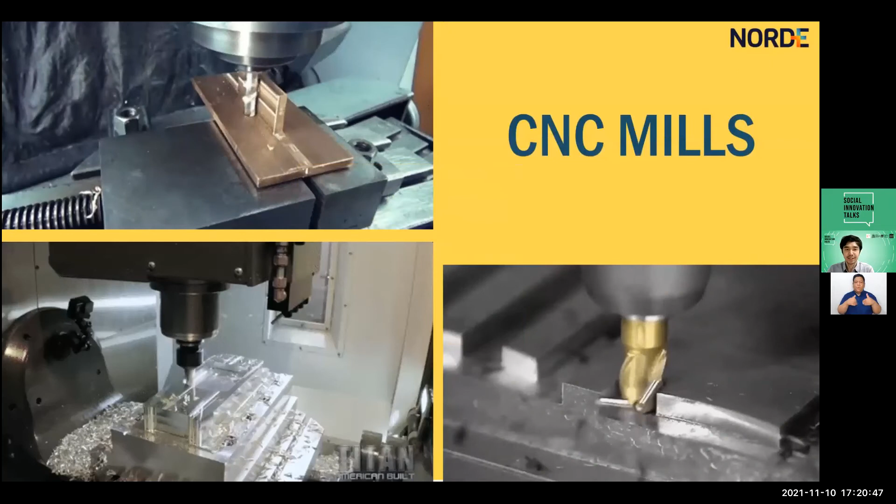It means that a computer is moving and controlling the machine using a system of numbers. Okay, now onto the first one, CNC mills.

In CNC mills, it uses a drill bit, a cutting bit, to remove and cut materials out. So if you've ever used a drill to cut a hole into a piece of wood, you're actually subtracting or removing wood to make that hole, and the same concept applies. Whether you're talking about a CNC mill, which moves in a 3D or XYZ coordinate, that's a form of removing, or a CNC lathe, which rotates the material to make the shapes, also a form of subtractive. All of these have in common that they are using G-code.

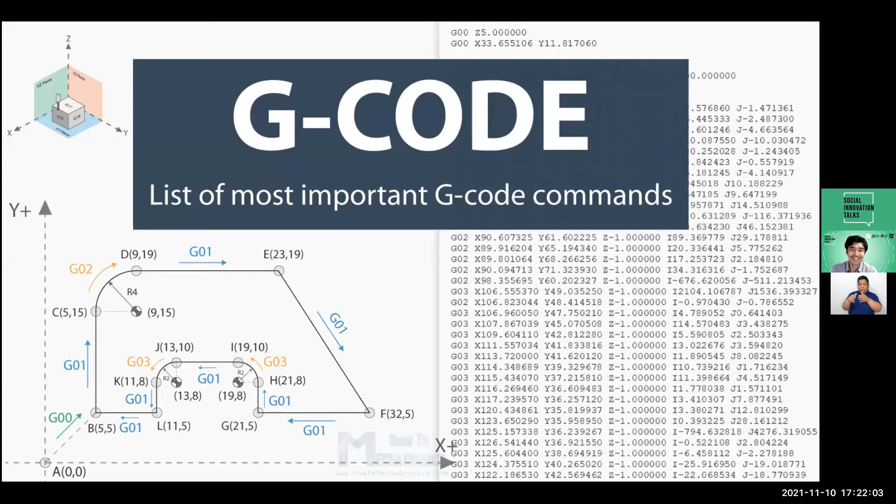G-code stands for the language or the kind of commands that operate these machines. Remember, we called it CNC, computer numerical control, because the computer uses numbers to control the motion. So every shape, no matter how complex, can be interpreted as a series of vectors and points made up of locations, made up of numbers, and that's how the machine operates. So looking at G-code is kind of like looking into the mind of the machine, but it's definitely quite complex.

Okay, so we saw CNC mills, which use a tool bit. Now we also have laser cutters. I think laser cutters are quite popular because they are fast, they're pretty cool looking, and they also produce very nice and intricate output. The idea here is the same: a laser cutter uses a high-powered beam of light, usually a laser, and it will burn the material, leaving behind the shape. So when you're cutting through wood, for example, it burns a line through the wood to cut out the shape.

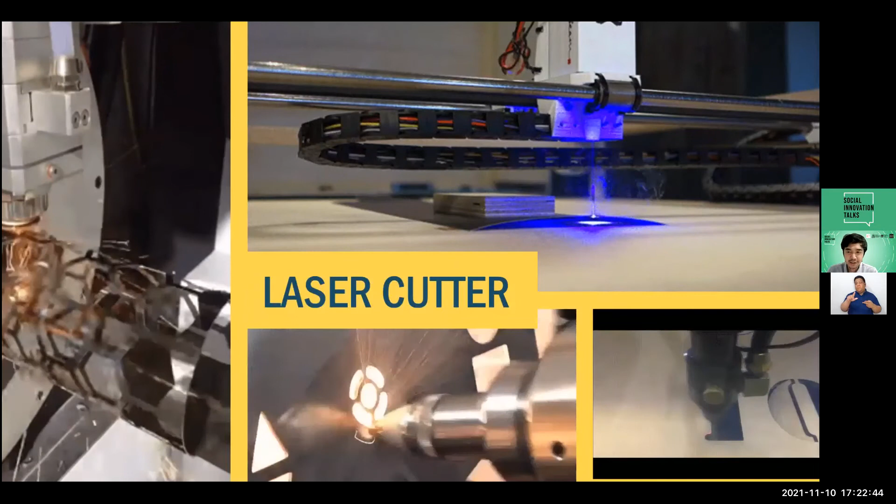Alternatively, you have plasma cutters, which you can just think of as super beefed up laser cutters. Instead, they use high-powered plasma to cut through materials, usually associated with metal. So plasma cutters are usually for cutting sheet metal.

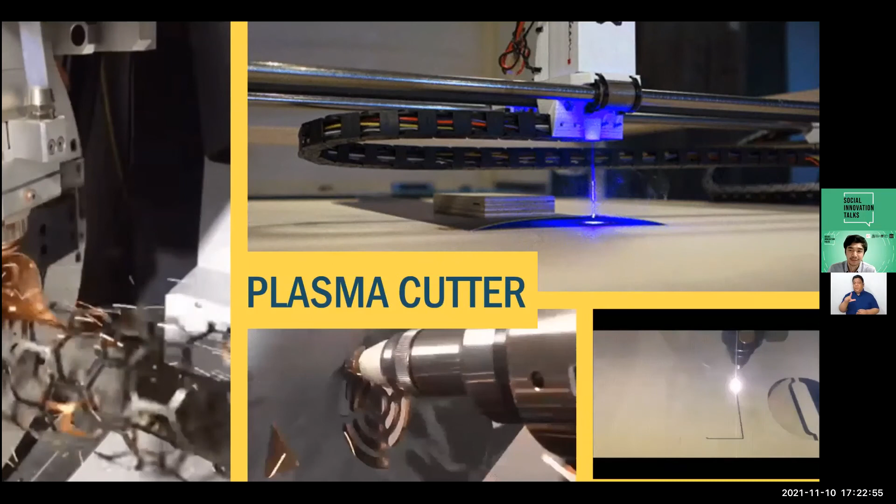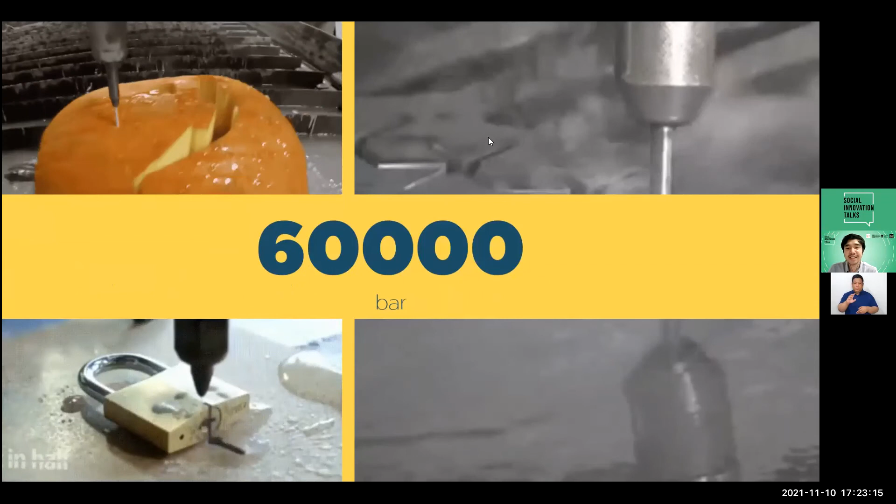One of the things you can also look at is water jet cutting. This one's kind of funny because it actually uses high-powered water that's been pressurized to cut these materials. Even things like a lock, even things like fruits, have been cut using a water jet. It pumps the water at maybe 60,000 bar of pressure. So the same process still applies: the water hits the material and actually cuts and removes the metal as it goes.

Another one in this technology, which also kind of counts, is called print and cut machines. If you've ever had a sticker made, you've had it printed onto a sticker sheet, and sometimes you'll have a vinyl cutter that cuts the material and cuts out the shape. So it's technically a subtractive machine, because the blade is cutting the material and subtracting material as it goes.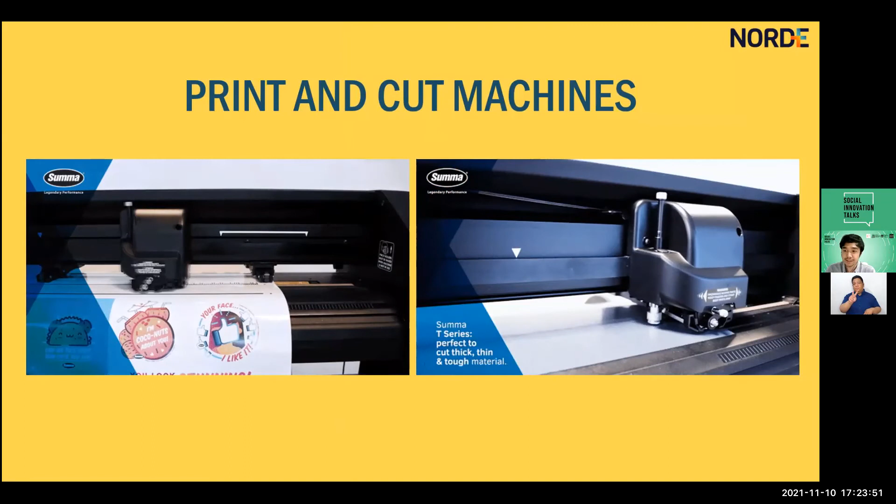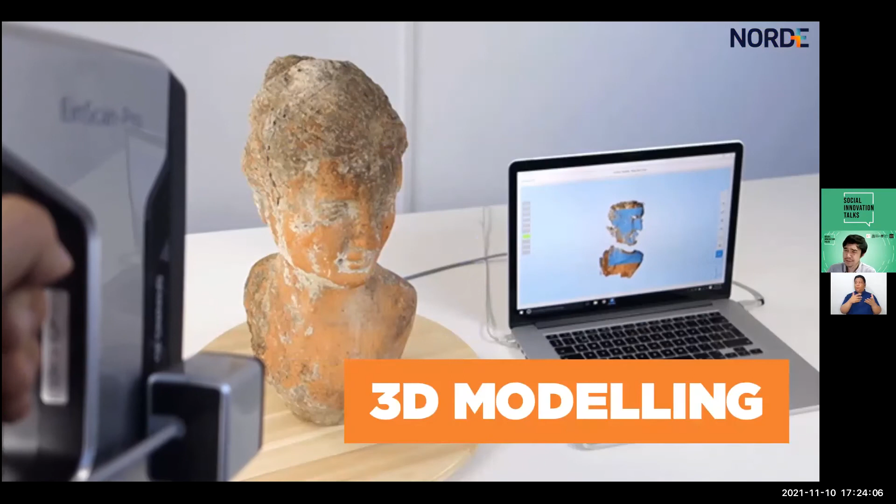Okay, so the next one we'll discuss is 3D modeling. Throughout all these conversations we've been talking about CAD, we've been talking about design software. We wanted to also mention, since it's a natural question, what kind of software do I need to make 3D models? When we talk about 3D modeling, there are many different approaches, many different forms.

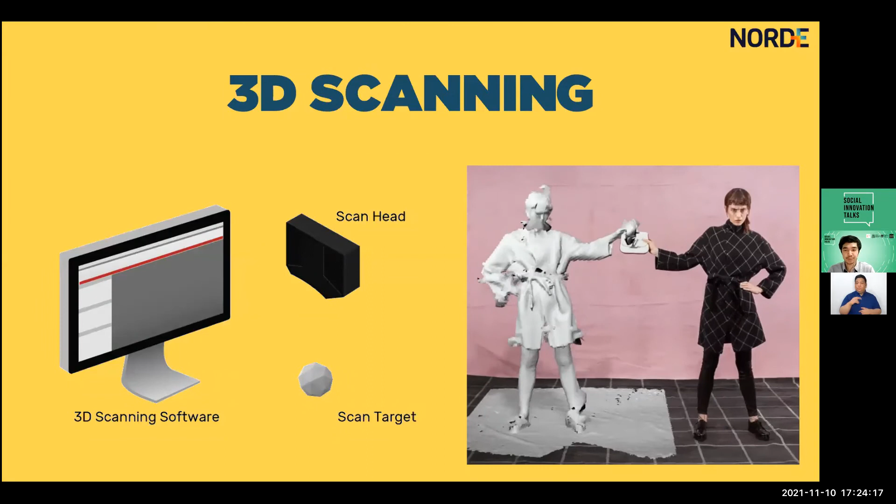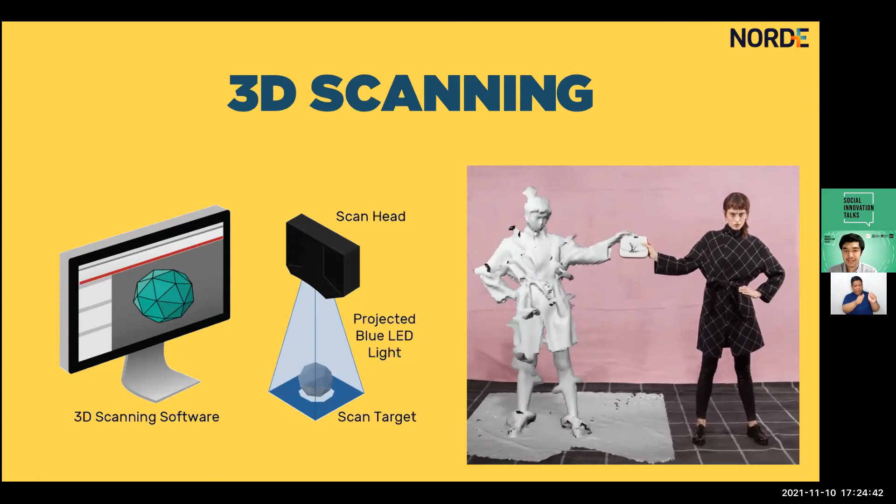The first one we can mention is 3D scanning. I don't know if anyone here has been lucky enough to have been 3D scanned, but it's a very cool experience, kind of like the idea of being digitized. The idea is the machine uses light—either multiple light beams or flashing light—to look at a pattern and make a 3D shape from it. So 3D scanning is one of the ways you can generate 3D models.

But the other way, and this is probably more common, is of course 3D modeling. If anyone has ever done animation, CAD, or engineering design, you'll know it's a very different thing to illustrate in 3D. The reason 3D modeling is so common is because if I were to ask you to draw a donut on a piece of paper, it would be kind of difficult—you'd have to do a series of rendering, shadowing and shading, and a certain amount of perspective distortion to make it interpretable as a 3D shape.

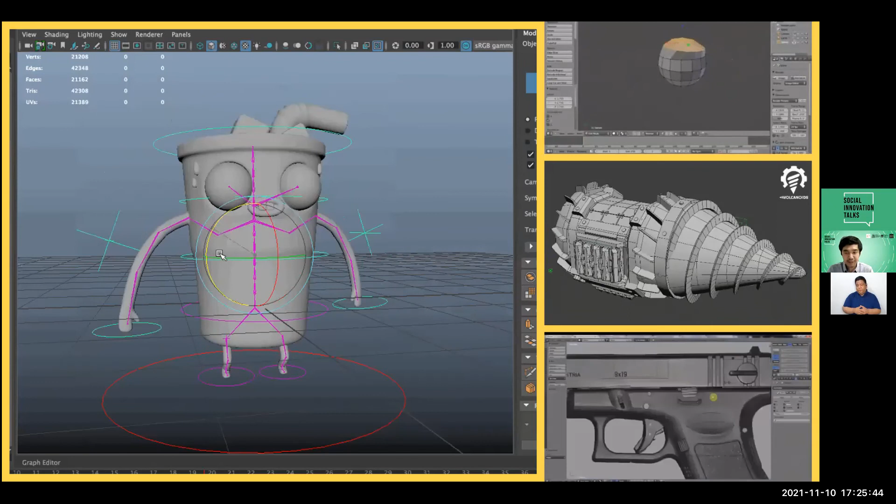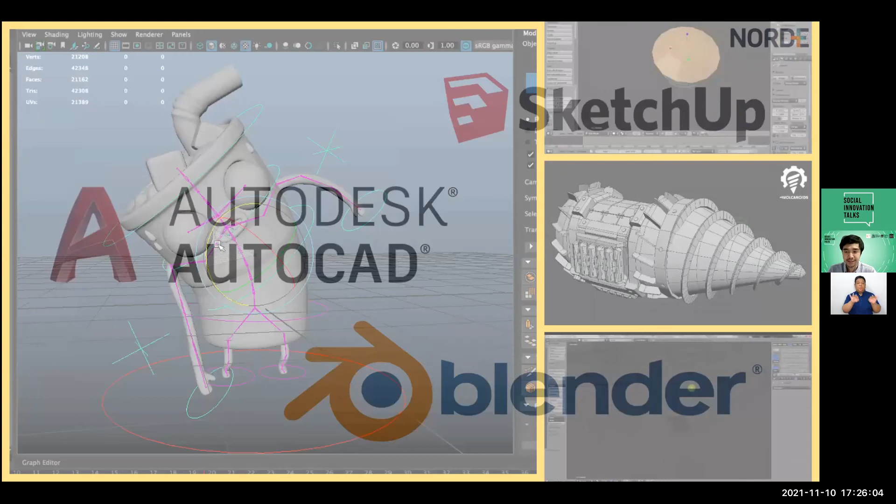With 3D modeling, because of digital technology, the computer can render it for you, so it's very easy to make 3D shapes. That's why CAD is super important, because 3D, which is difficult to produce on a 2D surface, is made easier using these digital forms. So when we talk about 3D modeling throughout this, we're not specific to a certain software. I may use CAD or specific brands, but you can actually make 3D models out of many software, some of them free and open source. But the idea is still the same: as long as you can design your ideas in 3D, that's the kind of software these technologies use.

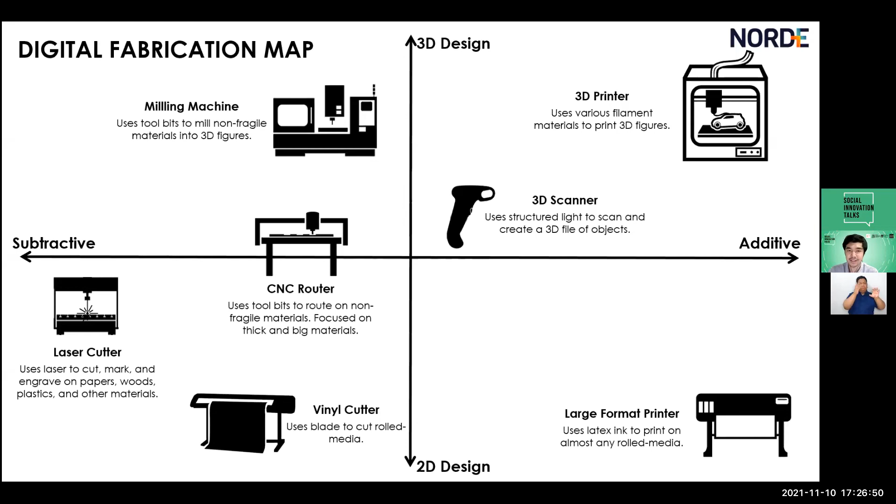Now, just to put it all back into perspective and help us interpret this network of 3D printing, we separate it into this matrix. On the left side of your screen is subtractive, and on the right side is additive. Bottom is more 2D and top is more 3D. So the machines are usually fit somewhere there. For example, a 2D printer is more 2D additive, while a laser cutter is more 2D subtractive. A 3D printer is more 3D additive. It's just a helpful way of interpreting and seeing these different machines, like a map for us to interpret.

Okay, that was supposed to be the break a while ago.

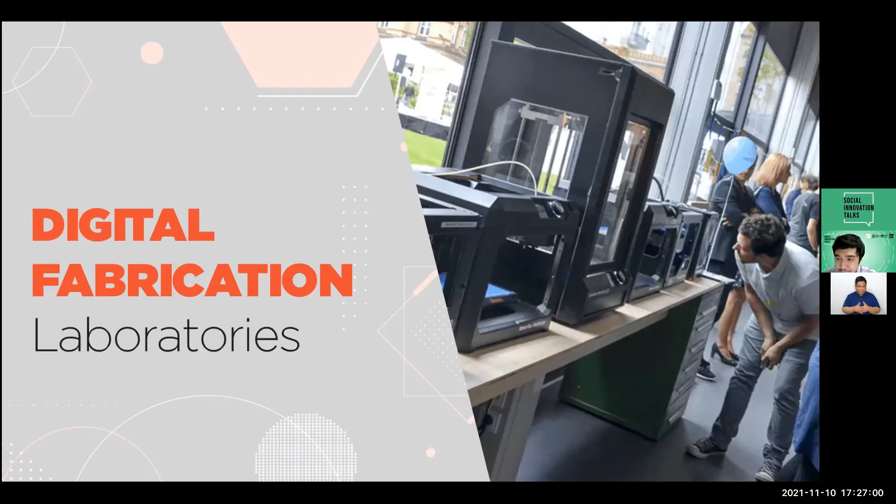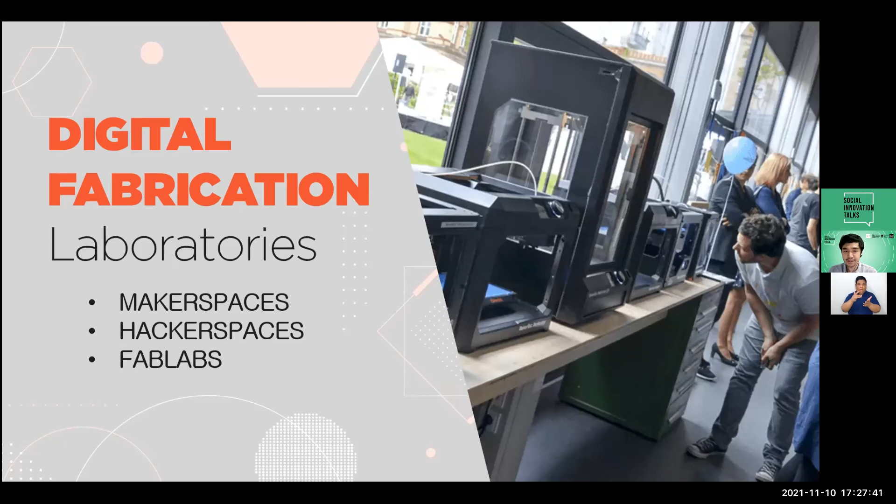So now we've talked about all these technologies, all these digital fabrication forms. One of the things I want to bring up are these three concepts: makerspaces, hackerspaces, and fab labs. Because we can talk about the technology all day long, but how does it affect us, how does it translate in a way we can use them? Digital fabrication has developed these laboratories, spaces where people experiment and use these technologies. The relevant ones that affect us, especially in an academic institution, are makerspaces, hackerspaces, and fab labs. They're all different forms of digital fabrication laboratories, and these different forms have different objectives. In the case of the fab lab, it may even be branded to some degree.

The first one is called a makerspace. In a makerspace the idea is quite simple: it's a space for people to make things. It is intentionally general, intentionally vague, because the idea in a makerspace is you don't want to limit any ideas. The goal is to facilitate the making, the ideation of anything, whether you're making a new musical instrument, a new work of art, trying to devise a cure for balding, whatever it is. A makerspace is designed to facilitate that act of making things. And when we say space, this means a place, a location—could be a laboratory, a library, someone's backyard. It's a space dedicated to help people make ideas come true.

Now a hackerspace is kind of similar in that it's also a space meant for new ideas, but it's called hacker because it has more to do with software. So if makerspace is more like hardware making things, hackerspaces are usually associated with programming, coding, new software. If you've heard of hackathons, where they have these events to program things in one or two days, those are kind of the same idea—spaces where people can come up with new ideas, but more on a software-oriented side. Now those two ideas, hackerspaces and makerspaces, are general; they refer to spaces which promote and facilitate innovation and creating ideas.

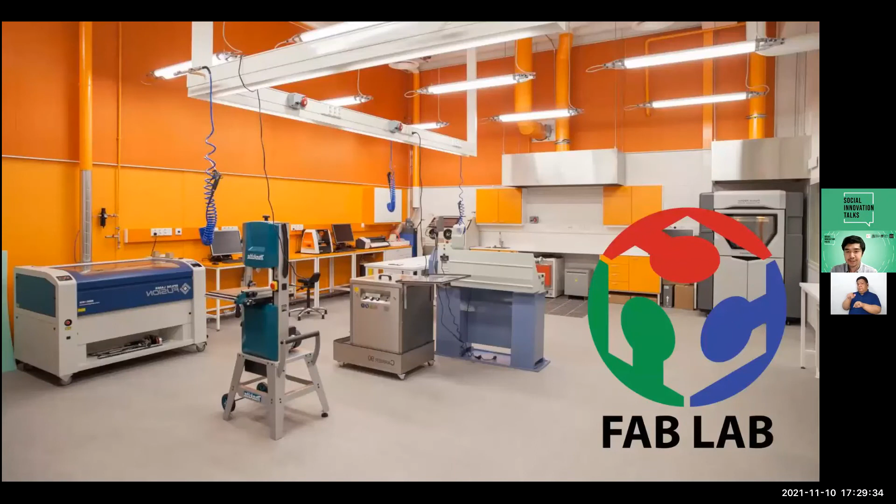The next one I want to introduce, which is kind of the star and I'll give us time to talk about, is the Fab Lab. The Fab Lab was actually an idea conceptualized by Neil Gershenfeld, an American professor at the Massachusetts Institute of Technology. Neil Gershenfeld's concept was that he wanted a place where they could make almost everything.

And that's how the Fab Lab came about. So the idea was, it is a laboratory, a fabrication laboratory, or Fab Lab. And the idea was that it's a space where anyone can make almost anything. But what makes a Fab Lab specific is that it's actually sort of like a brand name.

And the objective of these Fab Labs is to learn and to promote innovation, by promoting a space where people collaborate together, where people use digital fabrication tools to promote their own ideas, to work together, to cross-pollinate ideas, and to collaborate together to make these ideas come true. And that's why Fab Labs have sprung up all over the world.

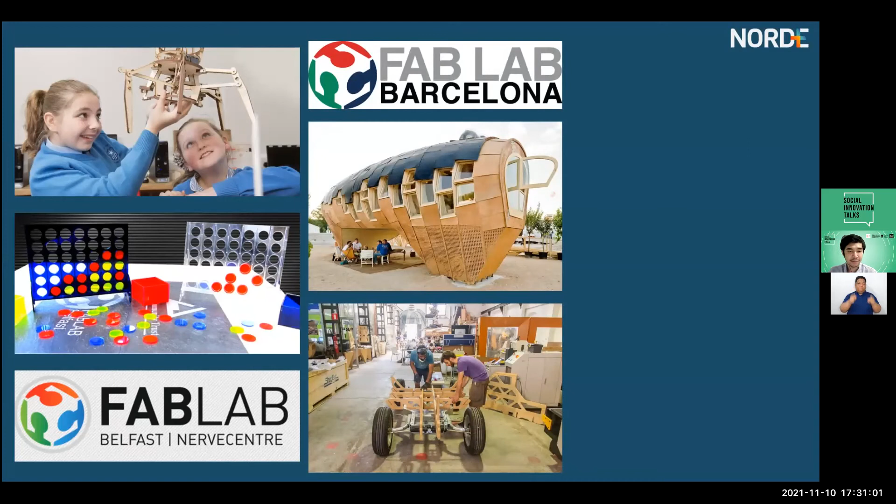Europe, we've got Barcelona, even one in Fab Lab Milan. And the interesting thing is, each of these Fab Labs can do different things. For example, the one in Belfast actually works with younger generations, meaning children, introducing digital technology to a younger age. In Barcelona, for example, this one works more with artists.

So those who have budding new inventions, new creations, innovative ideas that they want to try out - the Fab Lab helps make those ideas come true by providing them a space where they can test and make their ideas happen. In Milan, for example, this one works similar to an incubator.

They look at startups, businesses, new inventors, budding entrepreneurs who have ideas and products that they want to take to market. And they function as an incubator because they provide the tools for those startups to use - tools to make their prototypes that they can send to investors, that they can pitch and present with, that they can make proof of concept models. And it helps turn a startup get on its feet and release actual products.

So you see here, very different topics, very different target audiences, but all of them promote the same thing: collaboration and innovation using digital technology. Even in the Philippines. It's just cool to see this global trend happening and then seeing that it's actually here in the Philippines and is happening right now.

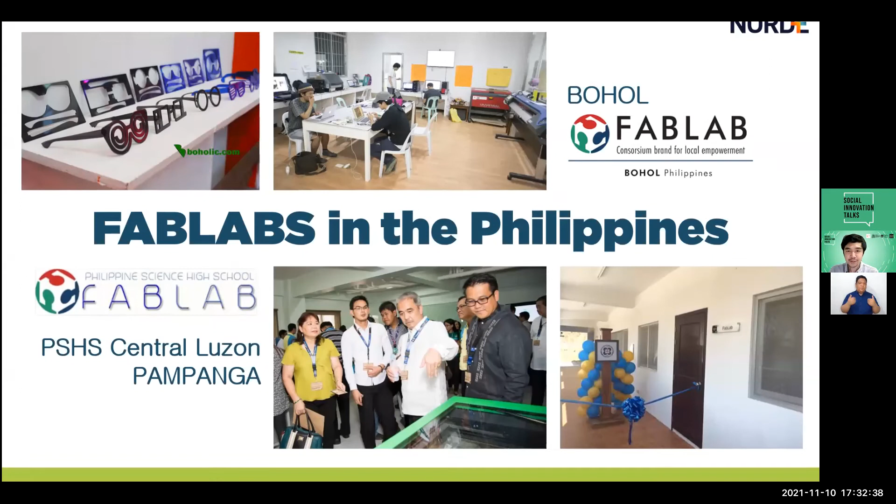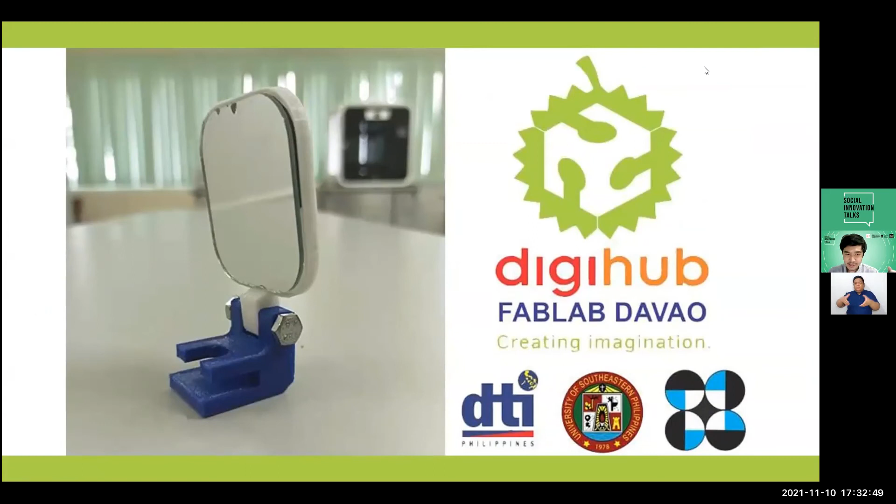So one of the Fab Labs is actually in DigiHub, in Fab Lab Davao, which actually works to facilitate as an incubator. It seeks to incubate startups to make their projects able to go to market. And actually, one of the ones mentioned here, Fab Lab Bohol, is actually the first Fab Lab in the Philippines.

And some of the Fab Labs here, their mandate is even to help MSMEs. They go to a location, they're established as a Fab Lab in that school, for example, and they look to assist MSMEs with innovation. So for example, if the MSME is selling local goods and they want to try using a laser cutter, rather than investing in their own digital fabrication machine, the Fab Lab allows the MSME to use their technology to come up with better packaging, better ideas.

For example, PSHS has their own Fab Lab. And what they do is they allow students to work in the Fab Lab. So imagine you're 13, 14, 15, and you're operating a laser cutter. Imagine that on your resume. Imagine that they can interact with clients, they can interact with businesses. And that's what these Fab Labs do.

They have this mandate to facilitate innovation, to provide spaces where people can innovate and collaborate together. And so Fab Labs have taken root in schools, they've taken root in government projects. They are government funded, and through the assistance of DTI, help promote innovation here in the Philippines.

And so one of the questions that we always have when we talk about digital fabrication is, where do I go? How do I access these technologies? And the answer is these Fab Labs, these maker spaces, who have the goal, have that mandate to actually use those technologies. All right, so I'm going to pause here, or technically stop here, and end my official presentation.